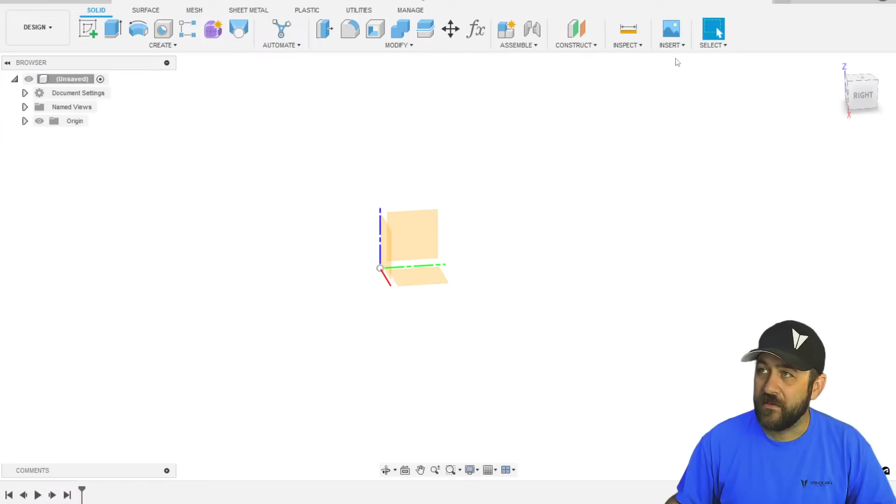Now, I am using a mouse and keyboard. So I'm going to turn on the origin, which will give me my 3 planes here. To pan and zoom around more easily, you can use the center click on your mouse to move around one way. And if you hold shift, that allows you to kind of rotate around. So you'll see me moving around like that a lot. A lot of people just don't know that little step, and it helps you navigate around what you're looking at a lot easier. So we're gonna start with a sketch.

We're gonna put a sketch here on the right plane. Sketches are just like a piece of paper in space. Everything is based off of a sketch. You have to start somewhere. So we're gonna start by clicking sketch up here on the top, and then we're going to select the right plane. So that'll put us flat to that plane. And if I'm doing a tube chassis, I usually start on that plane like that. It's acting kind of funny while streaming, but it's okay.

I'm just going to do the general A to C or A to B pillar setup that I would do on a tube chassis. So, up, back, straight back, and then down. And this is actually kind of where I would leave that. I wouldn't do the radii in this. I am going to do a line connecting the bottom, and I'm going to do a construction line. So rather than coming up here and clicking the line, I hit L on my keyboard. It's a quick little shortcut.

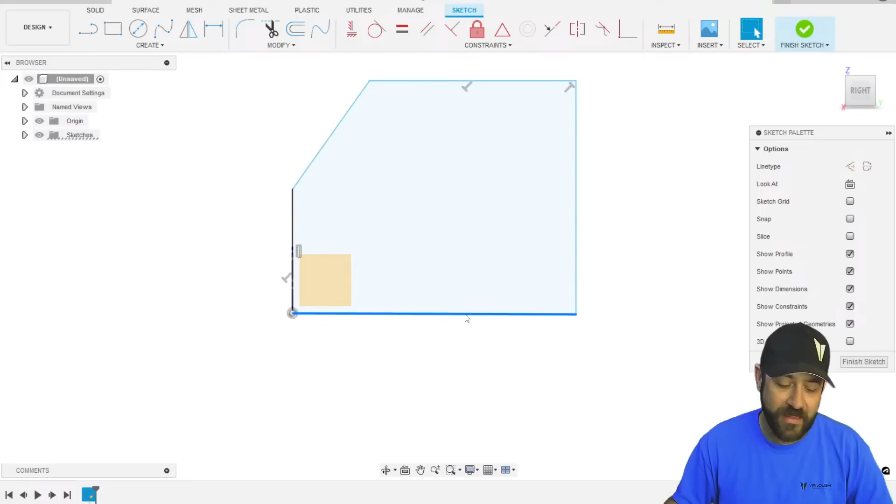I recommend you learn and use shortcuts. So go there, connect that. It's not necessarily needed, but I'm then going to reselect that bottom line and hit X, which changes it to a construction line. You can also click this button in the top that says construction. I'm also going to put a constraint on that bottom one to make it perfectly horizontal. You toggle that right up there. So anyway, that is very simple.

Let's throw a couple dimensions on here. Let's make this 100 millimeters tall, which I was already super close to. 100 millimeters is right at 4 inches. Maybe let's go 125, 5 inches tall. It'll rescale everything because it's the first dimension that we had. We can throw a couple of other things on here if we wanted, a 135. Let's go 120.

No, I don't like that either. Back to 125. Yeah. And then we'll just throw 55 at that guy. These dimensions aren't critical. I like to have a fully dimensioned sketch. That's where all the lines are black. I don't like leaving things that are hanging, because that gives you the opportunity to screw things up a lot easier. So we're gonna hit finish sketch.

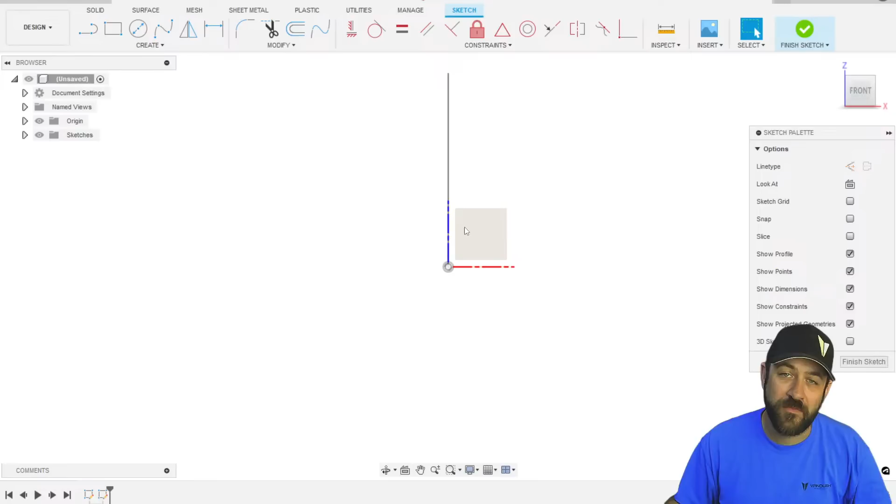Now, this doesn't look much like a tube chassis, I know, but this is how I start things. That's a normal sketch. From here, we get into what's considered a 3D sketch. And this, you can do it multiple ways. This is just the way that I like to do it, and I think it's easiest for me. So I did a new sketch, and then I just selected the front plane. It doesn't really matter what plane you select, though.

And one little tip for this. While the sketch tools are the same in all of these menus across the top, if you go to the surface menu up here and then go back to sketch, how things act is a little bit different, and that is helpful for what I'm about to do, because we're going to be drawing along all different points here. So over here on this right dialog, right behind my giant head, there's a little box that says 3D sketch. So click that on.

With that on, Ben, what additional CAM functionality comes with the paid version? It's things like rapids, just allowing the rapids to work, so you're not just traversing at feed speeds all the time, which is super annoying. So it's something I recommend.

Okay, so we clicked on 3D sketch. We selected line, and we're in the surface and then sketch menu. So from here, I'll come and I'll go to the first point, which is right down there on the origin, and you'll kind of come out and you see how it'll follow that red axis. So we'll follow that, and let's just do 75 millimeters out that way. Come up, do a line again, select on that point, and we'll do 75 again.

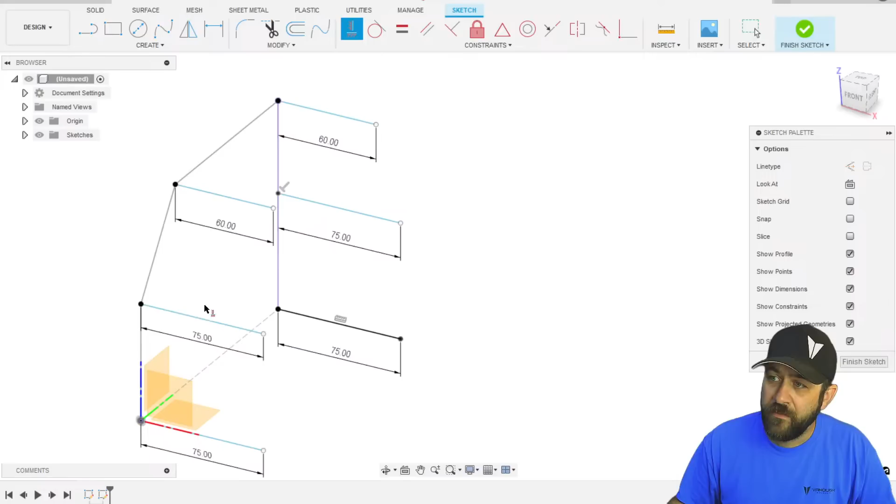So you can see that we're going to hit that horizontal vertical constraint button, and we're going to select all of those lines that we just made, and that will make all of them except this one here fully constrained. Now that's not constrained because we don't have a position on it height wise. You actually can't just grab it and move it, but it's just because of little things. So we're gonna grab a dimension here, and we're gonna say this was 55 in the first one, so we'll just match that to make things simple.

And now that that is fully constrained, you'll see these things, which may not make a lot of sense. But we're going to select each of those lines, and we're going to hit X to toggle them to construction. I just like to do this. It's not super necessary, but I suggest it. Now I'm going to go back to our line command, and I'm going to connect all of those new dots. I screwed up, so I hit escape.

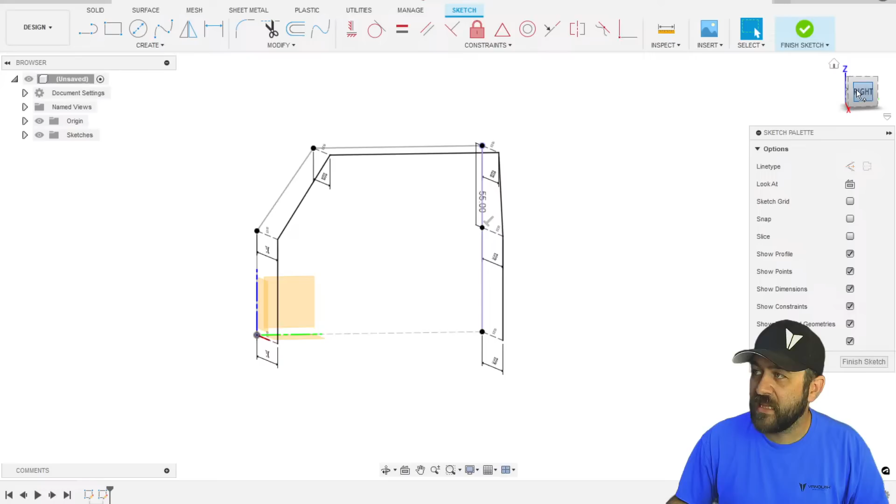So now we have basically what looks like the exact same sketch from the side, but when you rotate to the front, you can see now that you've got that tip in that you would normally have on a cage. So like I said, I didn't do the radius work on the previous ones because it would make doing what we just did here much more difficult. But now we can click that fillet command, and what I normally like to do is about a 15 millimeter radius. That works pretty close for my bender. So we're going to do that to there.

And I'm not going to do it back here. I don't typically like to have a radius joint right here. I guess if it's a cab only truck, you could, since that's all we've drawn. So actually, no, I'm going to leave it this way specifically for a reason. So now we've got what would become one tube, and then we'll have another here. So we need to add a radius here.

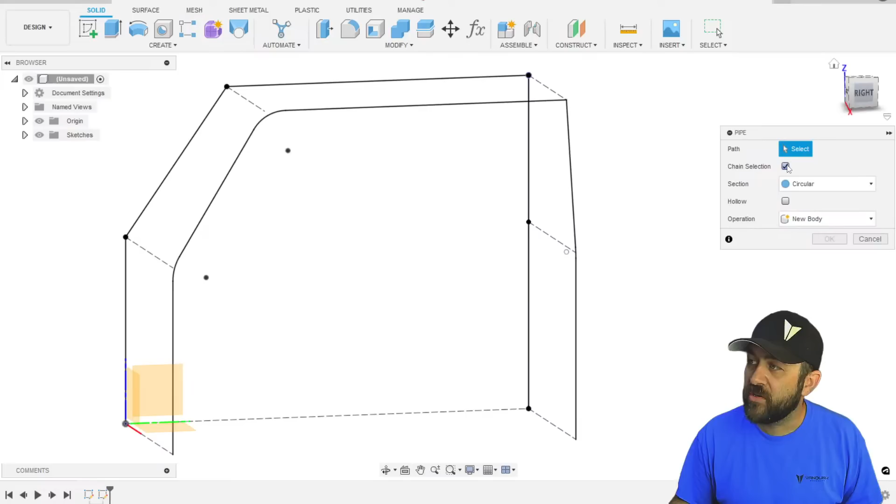15. So these will become two separate tubes. I'm going to hit finish sketch. So now we've got these sketches here. We can come up into the create menu, go down to pipe, and then we can select our path, which I'm gonna turn off chain selection. I'm gonna select the bottom, this one, that one, and that one, and we're gonna leave it right there.

We want to draw just like we want to fabricate. So 10 millimeter is much too large. We're going to type in 3/16 inch. I didn't want to do that. Need a space between the dimension and... 0.1875 inch, and it should be fine with it. Yeah. Sometimes it doesn't like when you combine math and unit changes, but it's no big deal. So we hit OK with that one. We're going to repeat that one time.

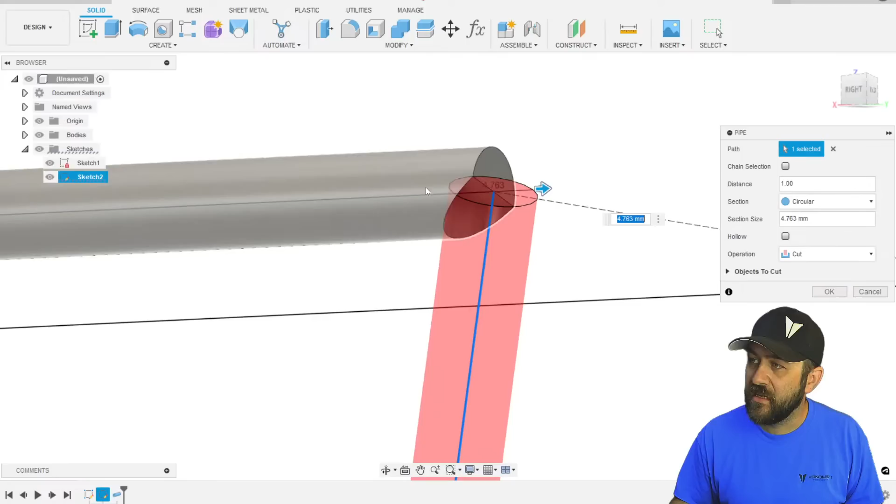Oh, you can see that our line disappeared. So if on the left side here, you expand the sketches, these are what we're looking for. We want to turn on sketch 2 again. So now you grab these, and you can see it's red, and that's because this is intersecting that one there, which is fine. We just change this to new body. You don't want to join it either. You want it to be a new body. It's important for metal fabrication. If you were 3D printing, it wouldn't be the way you would want to do.

Could you use a sweep here too? You could use a sweep. However, if you did a sweep, you would have to draw another profile at the bottom to start on. So basically, this just saves you a step. It makes things a little bit easier in general. It's really the only way that I do tube work is with this command. So even if I was fabricating this with tube instead of solid, I would do all these steps the same. You can make this a tube if you wanted to do like weight calcs and things like that, but in most situations, I don't feel like it's worth the extra work.

So we have a tube chassis set up, kind of, right? We're going to complete this a little bit to make it slightly more complete for you. Let's just do like a door intrusion bar style, and then we'll do a couple of crossbars, get everything mirrored so that it looks appropriate, and then I can just jump right into showing you the fixture side. So that's what we'll do next. We're gonna do a new sketch.

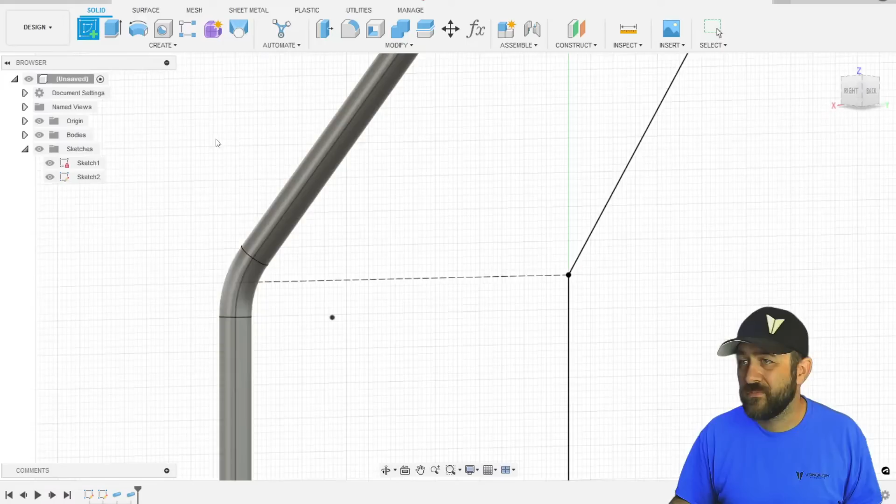I'm gonna jump into surface, and we still have to just select a plane. We can do this outside plane here, which, sorry, that's not the outside plane at all. We'll just select the right plane. That's fine. Actually, I'm not even really sure which one it selected for me, but it also doesn't matter. So like I said, when you go to surface and then sketch, things just act different. It's a little thing. It's really nice though. So I highly suggest it.

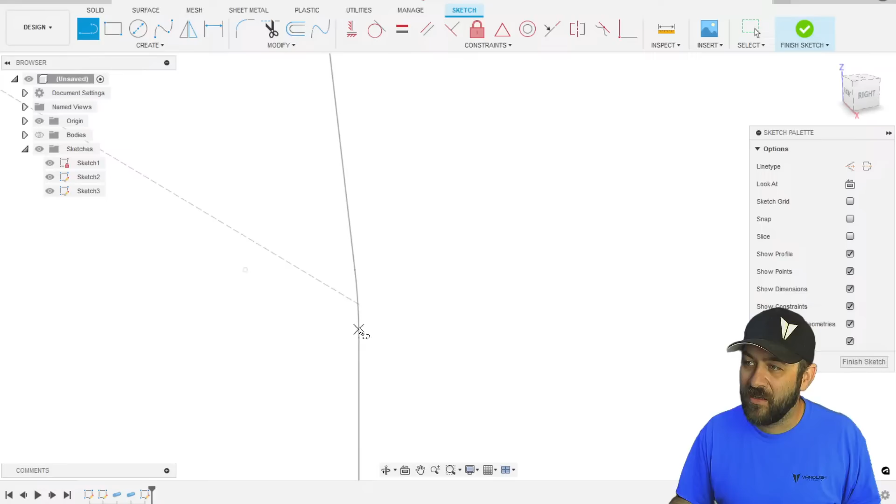And now we can just come in here and you see how it selects. When you zoom in, you can see that center point of that circle. There's a few ways you can make this easier on yourself, but if you turn off the bodies, then you can come in and select anywhere along that previous path, which is what we were working with. So if we select right at the center point of the radius, we follow that blue, let's just go out to whatever point we want, and then let's not go to the center point of the radius, let's do a little kick up, something like that.

Now, this here, let's dimension that. I hit the letter D, but you can see how this one here, if you look at it from the front, it'll actually tip in with it. It goes in and then it kind of goes along with that tube just because of how that top one goes. It's not a huge deal, but it would be a lot harder to draw if you didn't just do a 3D sketch. So let's put 130 on that. That'll define everything. We need to put a radius on.

15 again. Finish that sketch. We could do crossbars and everything in this one if we wanted. Sure, say you want to go back to it.

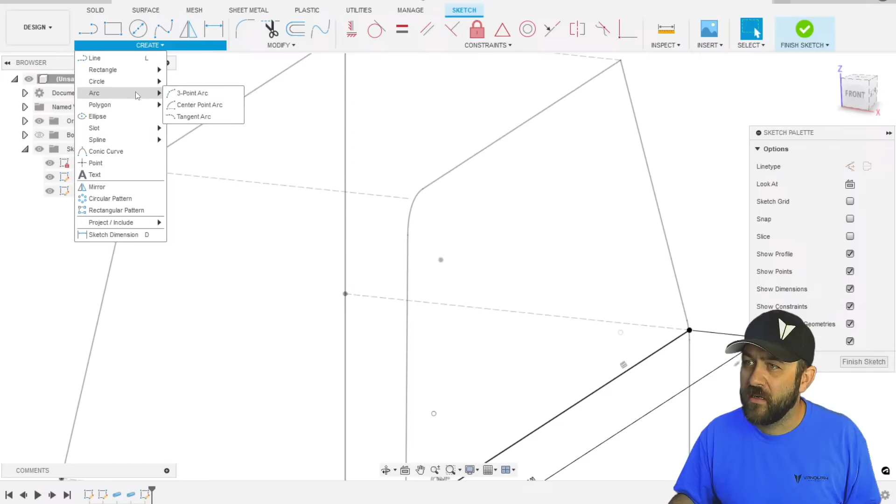Let's hit edit, edit sketch, and let's drop a top one in there. Let's do an arced one because why not? So we're gonna go from there to there.

This can be a little bit funny, but I'm clicking on that line. Now that won't give me the shape that I want, but it'll put the line in the plane that I want. So I'm cheating a little bit. You see how it goes out and then in? Not what I want, but it got me that line on that flat top plane.

So we're gonna do a tangent constraint on that, and that'll get it just how we want. We can throw a, I don't know, I was gonna say, I don't know why it's blue because it should be fully constrained, but it's fine. We're gonna hit finish now. One of the times I'm breaking that fully constrained normal rule that I go.

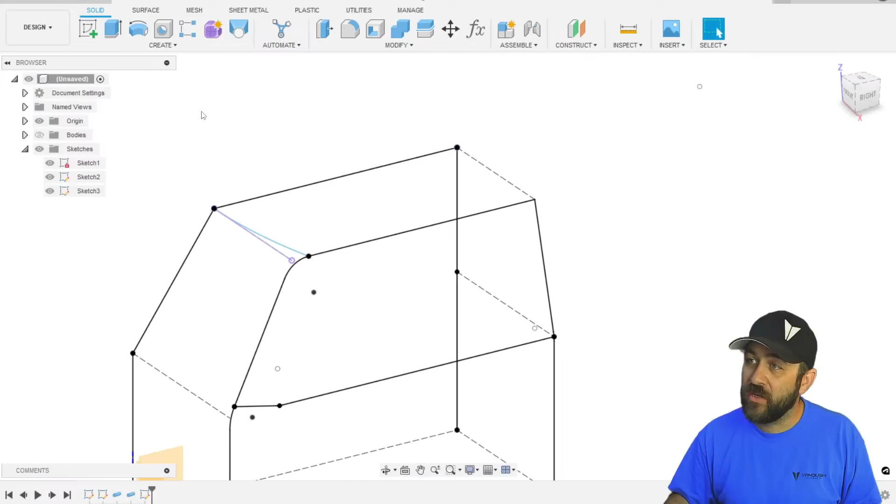So we've got this one, we've got that top. We can do a straight back here since that was, we'll go back and edit that sketch one more time. And actually we can just take this one and, oh, actually, no, we can't. Well, we could. We can hit P for project, select that line, hit OK.

Oh, no, actually I can't because I'm not on that work plane. It probably projected downward and I just didn't notice already. Oh, it actually projected way out here. We're going to delete that line out.

So now we've got three more tubes to do. We can turn bodies back on. Go to pipe, select that one, new body, everything else stays as it was, and repeat that process. Oh, we gotta turn our sketch back on since our lines disappeared. New body.

One more time. We can turn chain selection on here and then it will grab that whole line section. New body.

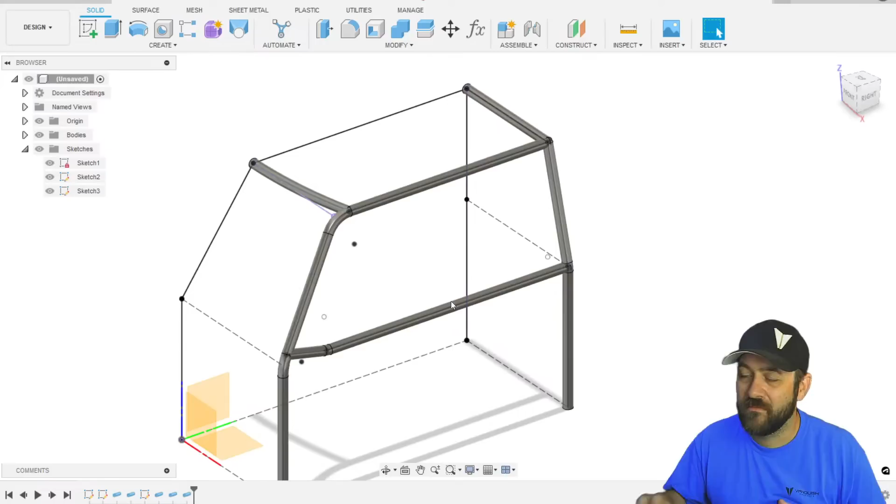So we now have basically the tubes that I think we need for what we're going to show. We could do, of course, the lower seatbelt bar in the back, our windshield bottom bar. There's all kinds of detail that we could throw in, but I want to get into showing you the fixturing and things like that, rather than just going through and adding a bunch of other steps for things that you may not actually need.

So we're going to do a mirror, and we're going to select the bodies that we want to mirror, which is pretty much all of them. Oop, we forgot a guy. That one. Select the mirror plane, that side. We're not going to hit join. We're just going to hit new body. Otherwise, it will make everything connect, and we don't want to do that.

So now we can hit combine, and we'll combine the ones that we want ourselves. So that, there you go. Now you have something that kind of looks like a cage.

One reason that I like drawing cages is so that I can always modify and change. Say there's something about this that in the end you just didn't like the style of. Well, you can go back to that very first sketch and say that I want this to be 135. I want it to be laid down way more.

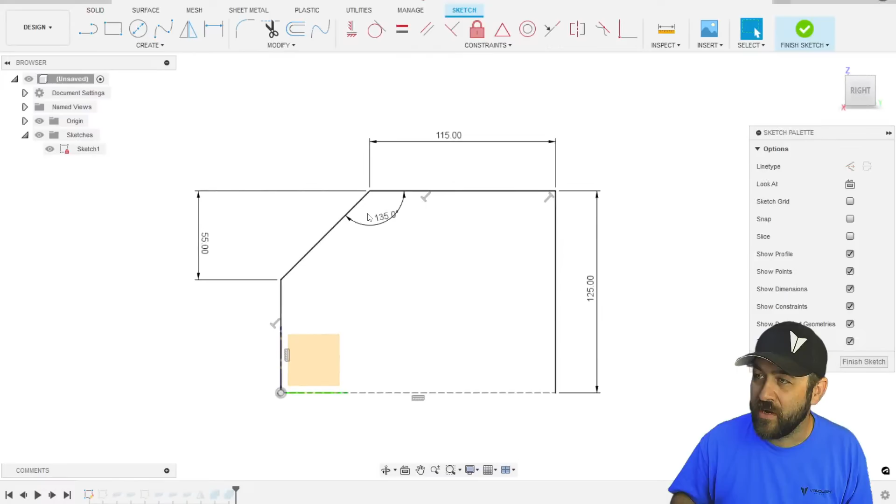And then when you hit finish sketch, it's now redone, and it's laid back, and you can see that I like that style way better than where we were before. So we're gonna leave that. You always have that ability.

If that wasn't the one, maybe you wanted more pinch at the top - that was in sketch number 2. You could go back and edit it. Maybe you want the front bar to tip in more, and the back needs to flare out. Whatever it is, you can just keep going back and tweaking your cage design over and over. That one visually I do not like, so I'm changing it.

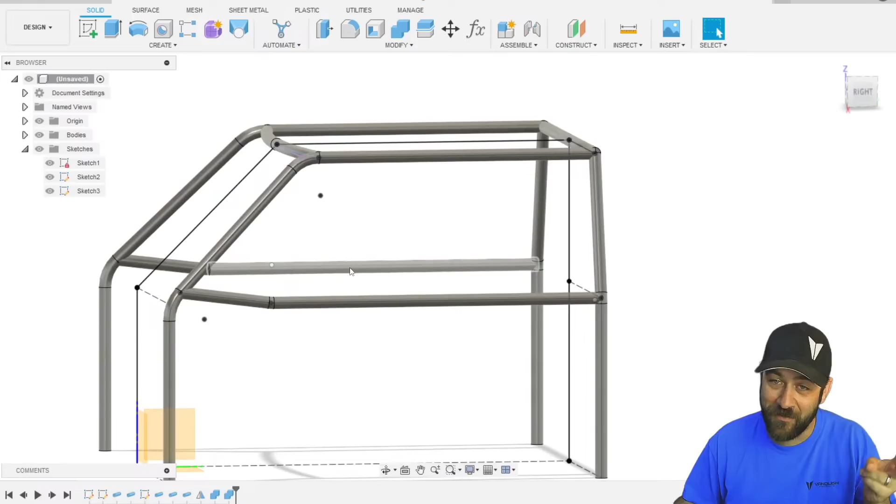So we're still going to go through it, whether some of you would like it. Hopefully it helps somebody, and I can show you how I've been doing things.

First of all, things that I've been doing lately that have really helped me are the 3D printed bend templates. Not the whole fixture even, just the template of the actual tube. Paper templates are great - they helped me build things more accurate, and I really enjoyed them. But 3D printed templates make me 5 times more accurate than paper templates did.

There's just certain things about projecting - taking a tube and putting it on a piece of paper, and you're kind of like, that seems about right, it's projected about. That's different than when you're putting it into this fixture that maybe even has complex bends, and you're like, that's perfect, that fits just right. So if you want to get into this stuff, this will make your work so much more precise, so much better. I can't say it enough.

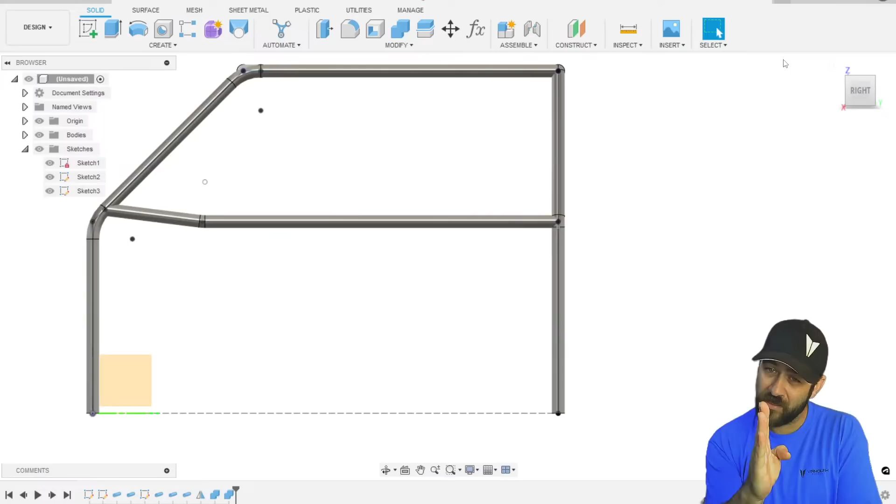There's ones that are way easier than others. So this tube here has a bend in it, and this tube here has a bend in it - those are both single plane bends. Even if this had 2 bends in it that were in that same plane, like if you looked at it straight on - like we look at this back one, that looks straight - it could have 5 bends in it going every which way, but as long as it was flat when viewed from the side, it's a single plane. That's the easiest way to do things, and the easiest way to make templates.

So let's do that one first. I'm gonna select all of these bodies just for the sake of it. I think I've got them all selected. I'm gonna hit the V button on the keyboard, and that'll turn them off. We can select that - oh, it doesn't work with sketches. Okay, that's fine.

So we've got just the single sketch on. We can even turn off this body for now. We need to create a plane here - again, a plane is like where you're setting the piece of paper for your sketch. It has to know where you are. So sometimes you need to make up those planes because they don't exist. When you start, you only have 3 planes - right, top, and front.

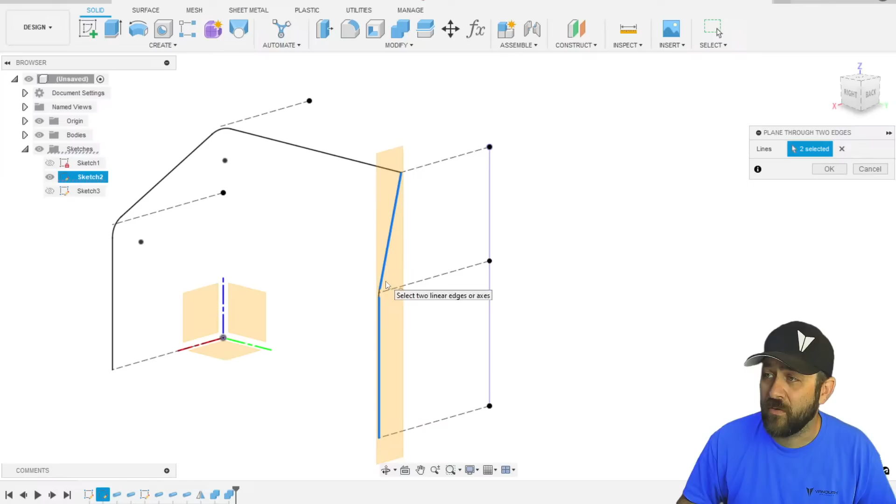But we need one over here. So we're going to go over to construct, hit that drop down, and use this plane through 3 points, or plane through 2 edges - you can use either one, they're both very easy. Say 2 edges in this one - we're just going to select this edge and this edge, and it's going to create a plane for us. Now we can hit sketch and select that plane, and it'll rotate to it.

From here, I'm just going to hit P for project, and select all 3 lines of that tube, making sure not to grab the line over there, which is actually our front tube - so we just have that. I'm going to project those, which means they're now in my sketch and I can use them. So I hit enter, and those are purple. Now I'm going to hit offset up here, and we're going to select all 3 of those again.

And I prefer to go to the inside of my bend. This dimension isn't critical, I like between 8 and 10 millimeters. We're going to hit -8, so it goes to the inside. And then from there, we're just going to connect the dots at the end to create a closed profile.

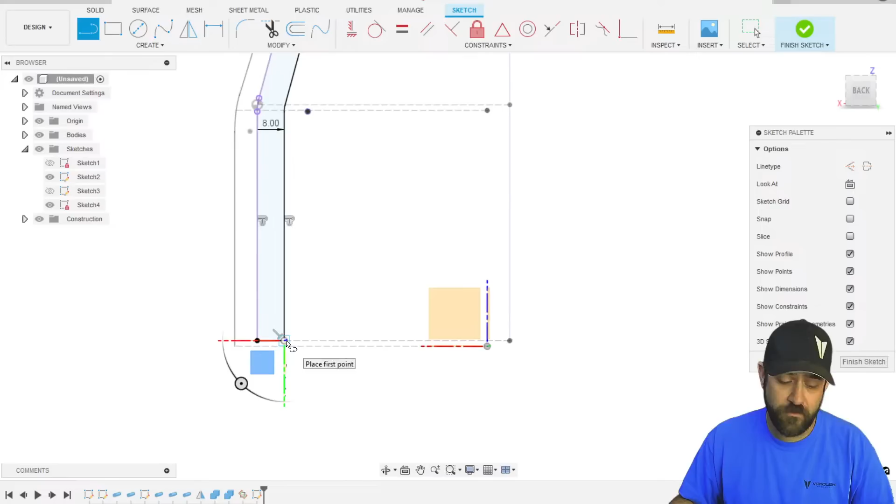Now we've got the template that we're going to use to create everything. I'm going to hit E for extrude, and select that. On the right side, we're going to hit symmetric, so it goes each way equally. We'll hit this toggle option, which means we type in one dimension for a total distance. A 3/16 tube is just under 5 millimeters, 4.7, so I like to go to 8 for a total width. New body, hit OK. So now it's just hanging out there.

When we go back to bodies, let's just turn everything on. Everything can kind of blend in here. I'm going to hit A for the appearance menu. That'll pop up. I'm going to right click and duplicate, then right click again and hit edit, and select a red color. Then I can drag that onto that body so you can see what we've created a little bit more.

Now we're going to go back up to that combine. We'll select that, and then we're actually going to use the subtract function. So select subtract. The target body is the thing we just created, and the tool body is the tube. Now we need to click this keep tools so it doesn't delete our tube that we started with. Then we're going to hit OK.

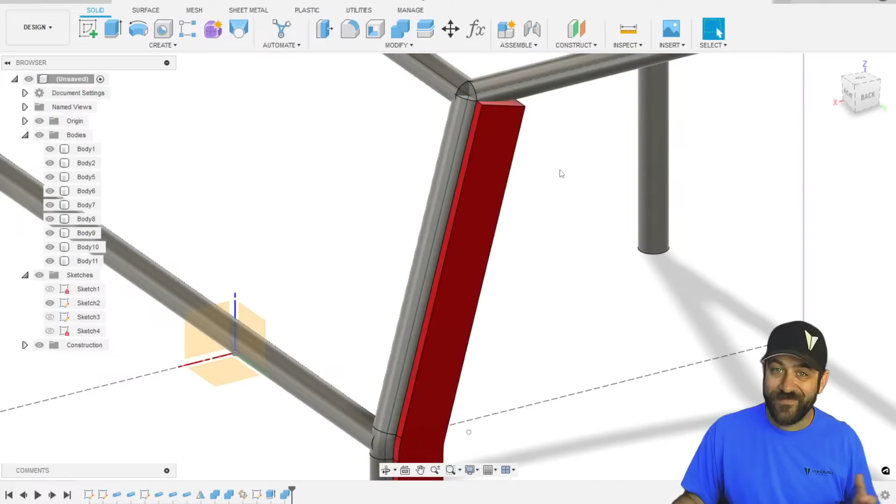And that's it, now we've got a perfect bend template. If I go over here, right click and hit isolate, it'll turn everything else off except that. And you can see now we have this perfect representation of what our tube should follow. And then you just export this piece.

You come over here and hit... before we do that, we're going to do one other thing. We're going to come in here and I'm going to hit the press pull, select where the tube goes. Now in here, I'm going to do -0.2, and you can see how that increased that radius a little bit. When we turn, I'm going to hit right click, unisolate.

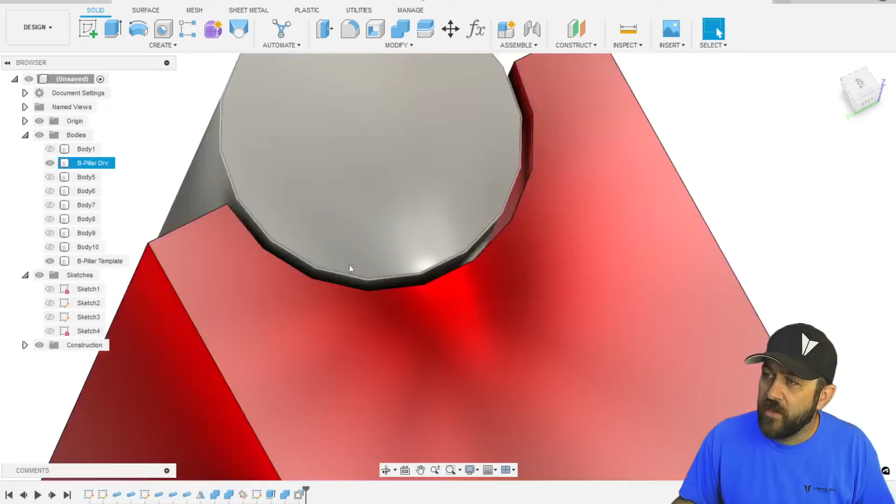So we're going to re-isolate, and I'm going to turn that guy back on. You can't see anything when I zoom out that far. You can see it just gives us that little bit of tolerance around there.

Everything's going to be a little off. Your printer's not going to be perfect, your tubing isn't going to be the perfect fit to the template. If you give yourself just a little bit of fudge room, you end up with something that's a little bit easier. It's one little step worth taking. You could modify that 0.2 to any dimension you want, but that's my recommendation, just to give you a little fudge factor. 0.15, 0.2, both of those have worked well for me.

Now, not only has this given us the bend template, so you'll be able to bend your tube and set it there and make sure it's the proper bend radius, also the bend position. Do not cut your tubes before this. Bend it first, leave extra on each end, and then this thing is also your length template because we made it the proper length. So mark your tube after this point at the bottom and at the top, and then cut it to that length. As long as your cage is accurate with everything else you've done, you end up with a tube that's supposed to be about this long.

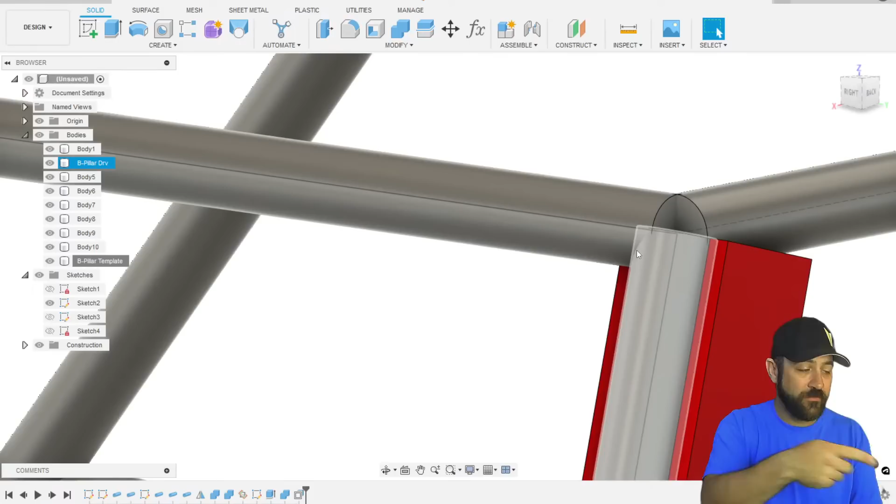You're going to have to do a little bit of coping at the ends, no big deal. If this amount of distance isn't what you want, like if you wanted a 45-degree cope, which is what I did on this truck in front of me, before you get to this point you'd just extend this by 3/32 of an inch, or not—you could leave it like that and fill it with braze or weld, whatever you plan to do.

Those are personal preferences on your end, how you like to fabricate. That's the reason I don't cope the joints in CAD—this gives me an easy way to calculate fab, and then I can go cope my joints in the garage and everything works out well.

This, though, is a length and bend template, not one of the fabrication jigs—that's a different process. But this is how I do these, and I'll do one for each tube that has a bend, and I even did it for the straight ones on this truck.

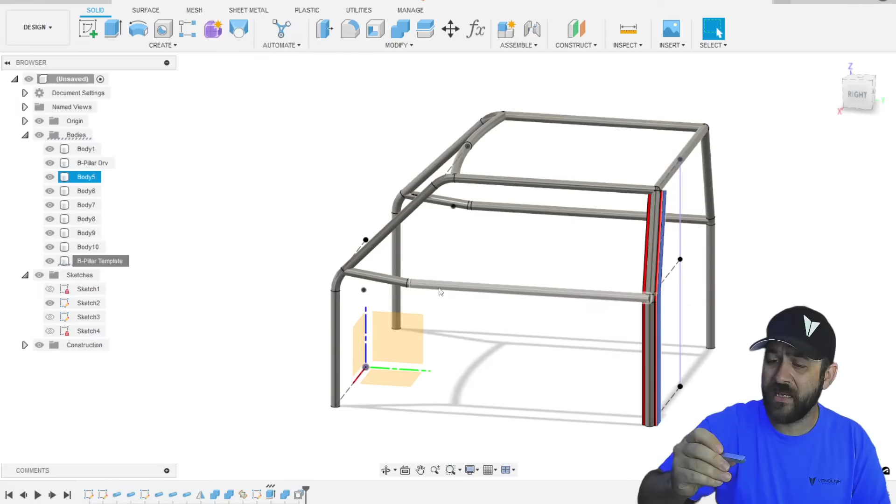This one, if you can see, says rear bumper. This was just a straight template, used so I knew the length it was supposed to be, and then I labeled what tube it was supposed to be right in the software.

If you're doing a ton of different templates, it's nice to label. Labeling's pretty easy if you want to—sketch, select your template, and then come up here to text. Just go, this is going to be...

I think you could have rotated, but click text on path—yeah, I could have done it that way before. And then this would have been B pillar.

We'll make this 6 millimeter... 5 millimeters. I like to use Impact—it's easy to print and it looks good. Lowercase looks like crap, but whatever.

So once we've done that, finish sketch, select it, hit E, and go -0.2. That gives you a full layer height of 3D printing, which is usually enough.

Labeling's nice—it's easy to forget, especially with straight little templates, because it's like, which one was this? So it's worth doing. The bends you can usually determine which is which, if that makes sense.

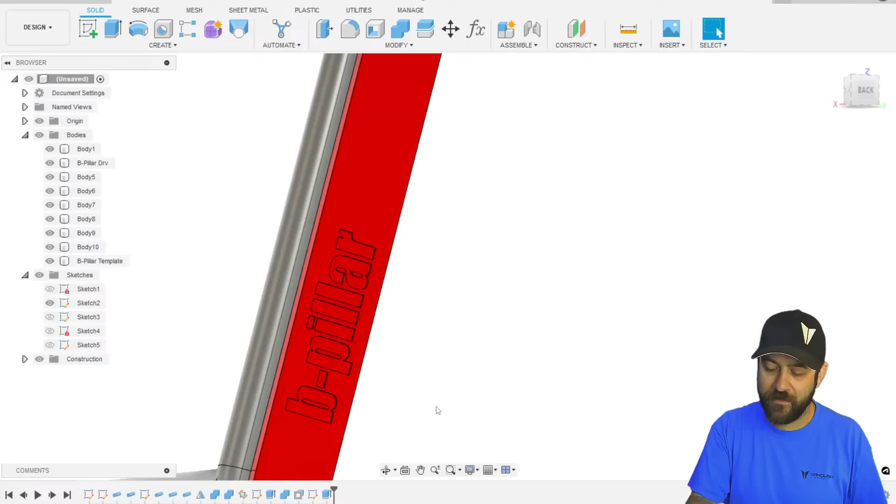Now, the fabrication jig side, showing that part of it. This process is pretty straightforward for the rest of them. It does get tricky with this A pillar.

That's a little more tricky because it's multiple pieces, but you could do basically the same process in a couple steps—one plane for the top portion, one plane for the bottom portion, then join the pieces when you're done. That should work fine for most people.

There's different ways to do it, up to you on how you'd like, but that should give you an idea of the principle of the project. So I'm going to turn that one off—we don't need it.

I talked a little about creating new planes before, and that's basically what you'll be doing over and over to create the jigs for fixturing. So we're going to turn off most of these bodies.

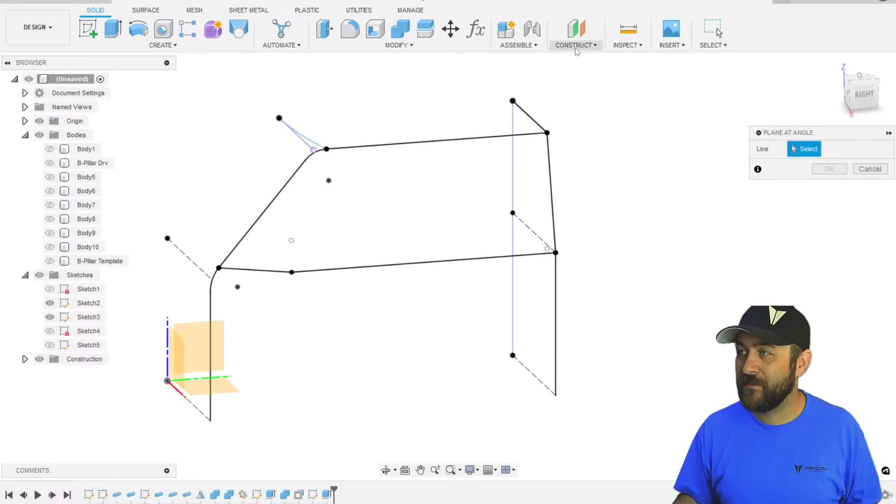And we're going to turn on those two sketches. From here, we're going to hit new—well, not new sketch, not yet. We're going to come up to construct, and we're going to do plane at angle. Plane at angle is going to be our first one.

So we'll select that top tube there. Now you could do this flat, works fine, but it can make it harder to get the tubes in and out of the jigs once everything's welded in place. So I'd suggest rotating this plane to an angle. You could go straight in, but I don't recommend that either, because once you weld the two halves together you end up with the same thing. 45 works pretty well.

And from here now, you can just do a sketch on that plane.

And we'll just do a box. We're going to dimension 4 millimeters off that way, 8 millimeters total. And we want to stay a little ways away from the intersections because of the heat that will creep from the tubes as you're welding.

And if you're planning to braze, you can still use all of this to fit things up and make sure everything fits perfectly and then take it away to do that. Or try and get some heat blocking putty. There's things you could try, but I think this mainly works best for TIG welding.

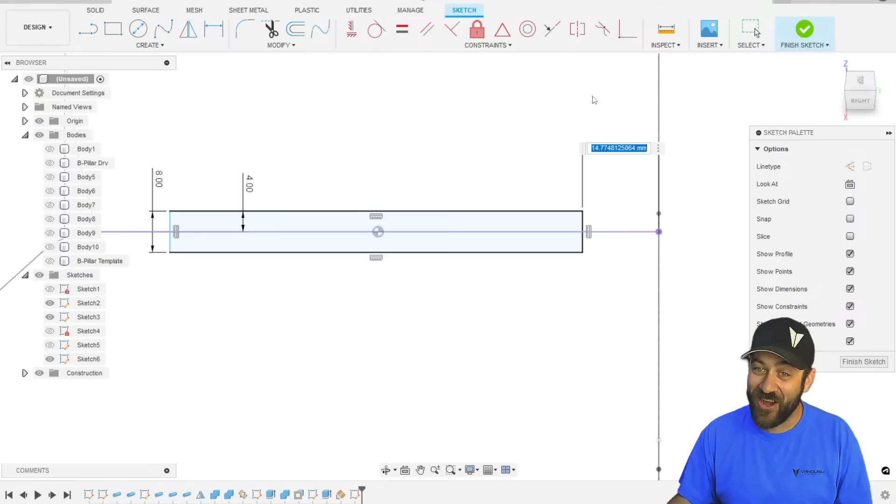And I agree that now you need to know CAD, you need to have a 3D printer, you gotta have a TIG welder. All of this is why this show is so wildly unpopular. I know why this show does not do well. I just alienate everybody slowly or quickly even. But thanks for being here for it.

We're going 25 millimeters away. That leaves a short section, but that's all you need because you're going to have had a template to make sure that it was the right bend shape. So we're just going to make a few of these along the way, and that'll give you the places to put it. So we've created that. We're going to hit E for extrude. Drop that guy down, say 20 millimeters for now. It doesn't really matter at this point, but we need to repeat that a bunch.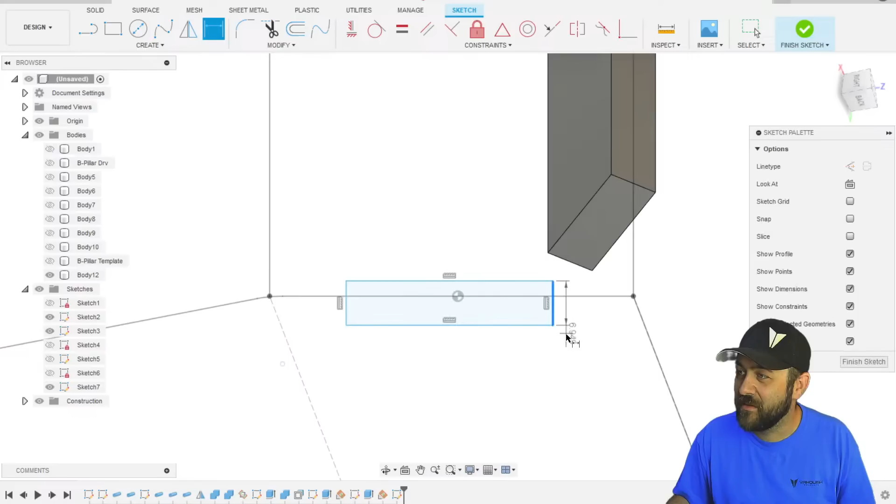8 there, 4 there. After we get through this part of it, we've got to connect all of these random little... escape, undo. We may have to go to 20. Otherwise, we're just not going to end up with enough. So there. This will all make sense. Don't worry your pretty little heads. 45. Nope, that's 45 the wrong direction. So we're going to hit edit feature, and rather than 45, we're going to hit negative 45.

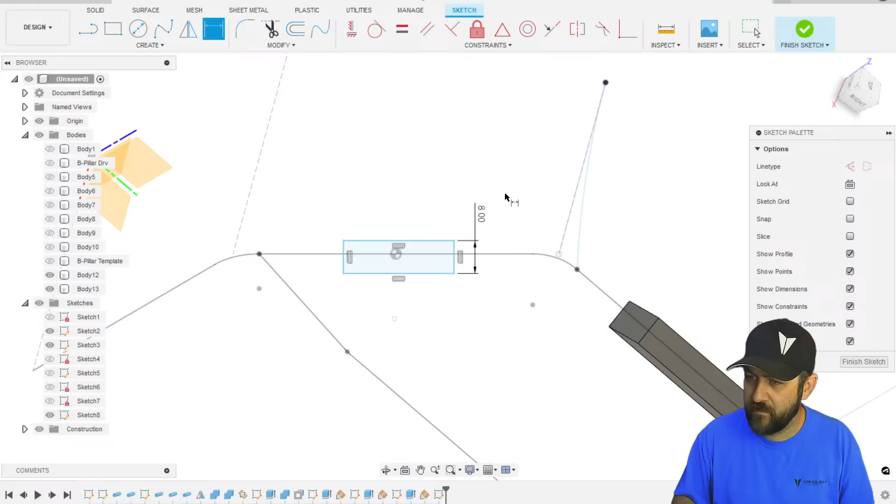What in the world did I do there? There we go. I don't know. Maybe that's what I did before. Just look wrong. I'm gonna go to 20 on those. Oh, we need to set our 4. Something like that.

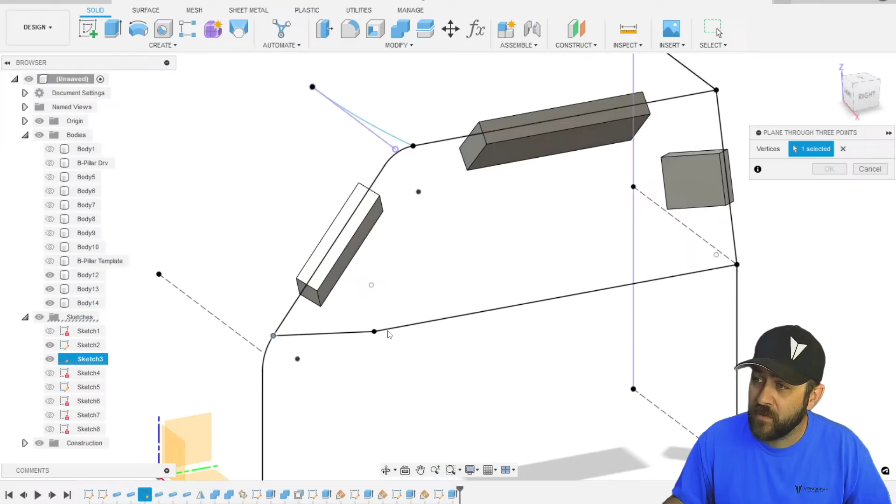Any chance you could go over importing a 3D scan? Yeah, I think that this is probably going about quick enough that we'll probably be able to get to that. It is something I wanted to do. So before I talked about creating a plane through 2 edges. I also mentioned you can use 3 points. That's another one that I like. So I did 3 points there, and we'll just click this one, and this one.

Now I'm gonna hit P for project. We're gonna grab those, and I'm just gonna do my offset. Same thing the opposite way. -4, and then I'll create a line out here, something like that.

Is there a shortcut key for adding dimensions? D for dimension. That is the one that I use all the time. I use shortcuts a lot. I probably do it unconsciously, and I forget to tell you guys. Yeah, if you have any questions, absolutely drop them.

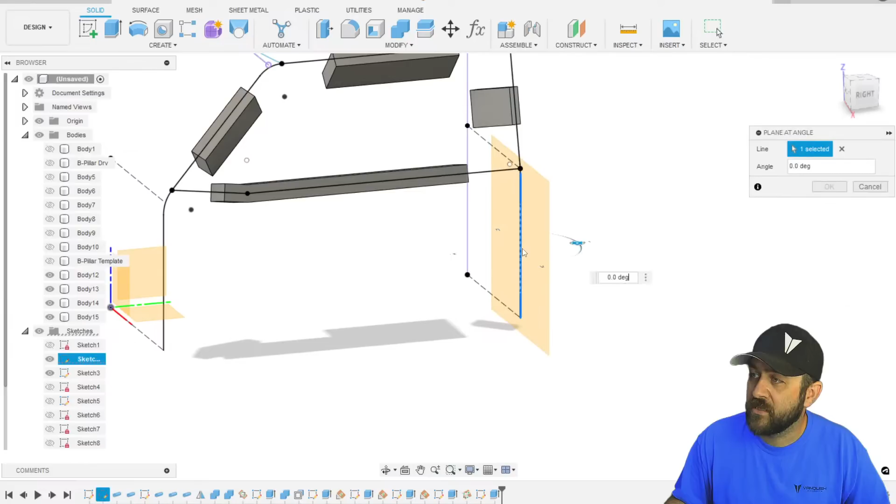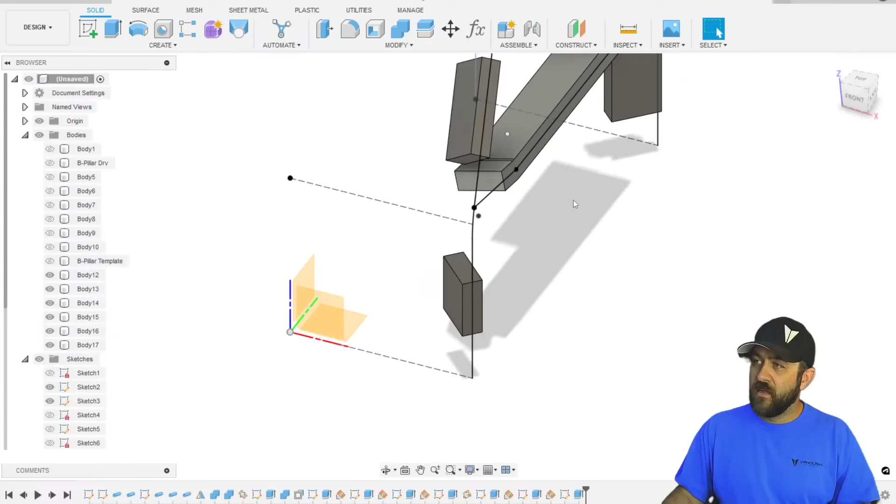So you can see that one was at a bit of an angle already. That's why I just kind of left it like that. And we need a couple more, and then we'll be able to go to the next chapter. Actually, what's 45? Yep, we're gonna go 45. And 20. We'll do one more down here. How did I do this again? I forgot. So we'll just do from down here. 20. All right. So now we've got all these random stuff.

Josh, how would you design your cages if you didn't have CAD? I've been designing my roll cages in CAD since, I don't know, like 12 or 15 years now. There's no better way for me to do it. CAD is the way to do it. CAD is the way that it's done in the full-size world. Honestly, if I wasn't designing in CAD, I guess I would only be freehanding, because to me, there's not a barrier for CAD now.

There used to be. There weren't free CAD programs before. They were super hard to get. It was a nightmare. Now they're available for free. So the only thing stopping you is not wanting to learn. Of course, there's not having a computer that can run it. That's 100% a thing.

Computers aren't necessarily inexpensive, so there is that. That's a thing, I get it. You know, graph paper can work. There are other options, but that's the thing. You can do it old school, which is just CAD before CAD, CAD before computers: cardboard aided design.

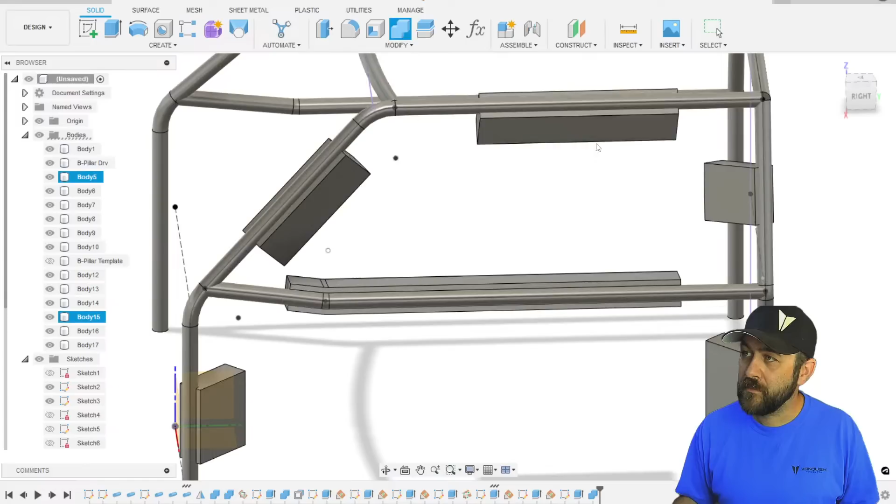So now we need to do what we did with the other template, and we need to create the groove. So we need to make sure keep tools is on, and we've got to go through this process a handful of times quickly. Make sure you're selecting the block first and then the tube. That's the order of operations for this particular tool.

So we've got all of these things hanging around now. The hard part is over. That's the hard part of creating these silly jigs that I've been making. From here, we're just gonna create a new sketch. We're gonna go to the bottom. And now we just need to connect from the, you know, tore up from the floor up. We're starting on the bottom, and now we're here.

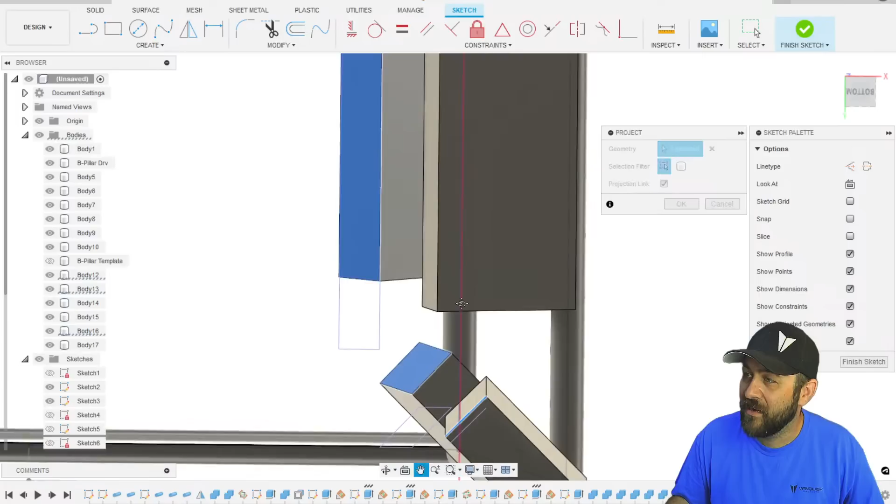What other things could I reference? So I'm gonna hit P for project. I'm gonna grab the back side of this one, back side of that one. That one is flat, so we're just gonna grab that line there. We're gonna grab that guy. We got anybody else floating around? We need that one. And we need just this line here. Do we got them all? Gotta catch them all. So those are our areas we need to connect. Hit look at, and it'll rotate us up.

So we got that. Now I'm gonna turn off bodies for a minute, because this does not have to be fancy. Well, actually, I'm gonna undo a couple of those, and we're gonna do this slightly different. We're gonna hit finish first, okay? We're gonna turn bodies back on. There we go. And we're just gonna extrude up to some of these for a moment. So we have those profiles that we've done there.

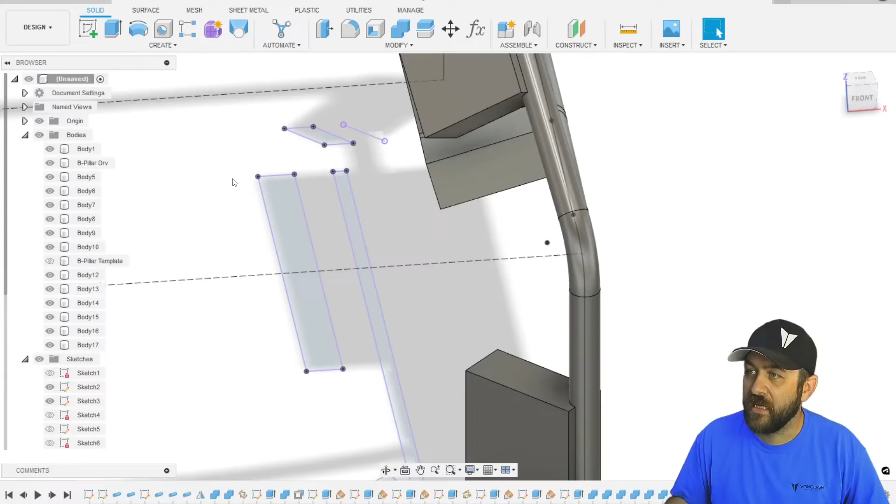We're gonna hit E for extrude, click that. Over here where it says distance, we're gonna say to object. And then we're gonna extrude that up to this object. And we're going to hit this one over here. This brings it up to all the edges. It can matter depending on the ones you're doing. Now, of course, it's intersecting, so it wants to cut. We could say either join or new body. I suggest you do new body still. Otherwise, you can start connecting your tube work to your fixtures. So it's just an easier way to do it.

We do need to go turn our other sketch back on because we need that. And we're just gonna repeat that same process for the rest of these. Again, you have a lot of options. At this point, you could just extrude this guy back so it touches there, same here, and you start blending stuff, but I'm not gonna do that just because of brain power while streaming. I'm not saying that I wouldn't or I haven't done those. I'll open up the jig file that I made for the hack after we get through this part, just to show you what I went through on that one.

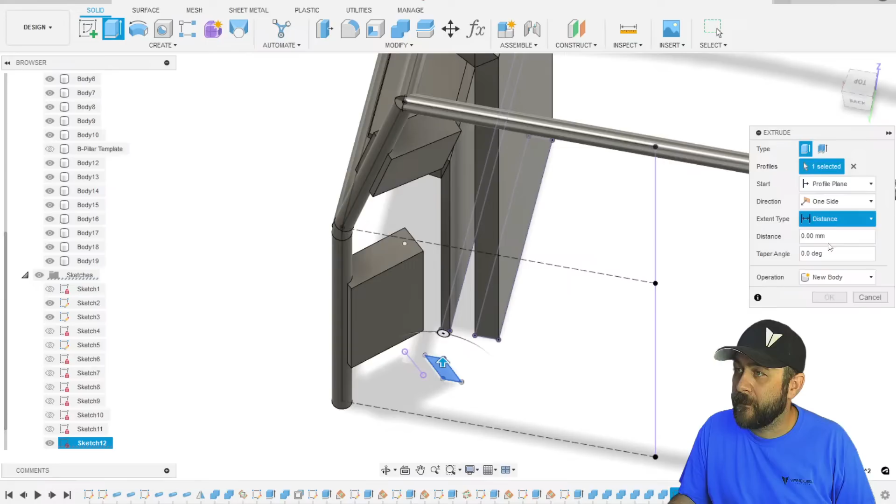Extrude to object, new body. So you can see we're starting to get all of the things aligned. This one, we can grab those two profiles. Oops, to object is what I meant. Kind of a funny guy hanging up there. We're gonna be able to fix that super easily, and I'll show you how in a bit. Not a big deal. So we still have these guys floating out there. That's not a tough one to solve though, so we're gonna be in good shape.

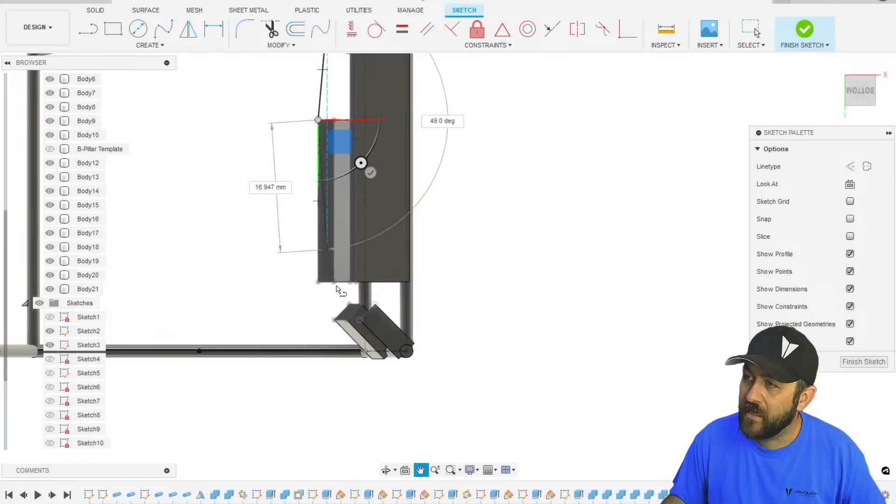I'm gonna go back to the bottom. And now we can just kind of connect some dots, honestly. Like that. We'll just go back. We're going to project that whole thing, but we're not going to go the whole distance. We're just going to go to there. I'm going to go all the way across just because it'll give us a nice wide base. I'll hit a horizontal constraint on that guy. There we go. Project that. We'll make that intersect.

So we're still open. Where am I missing a profile? Oh, this is not projected into here probably. Same goes for here. So there, it's got it closed.

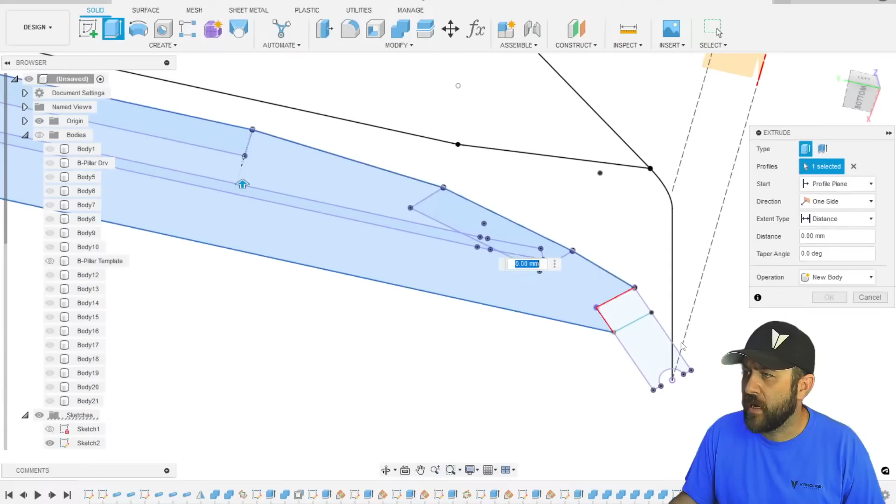So now we're just going to be able to grab all of that, grab this and this, and let's just go up 8 millimeters. 10's a little fat on a base. Turn the bodies on so it shows, and hit new body. Okay. We haven't connected that guy yet. We just had an overlap, so. That there. It's okay.

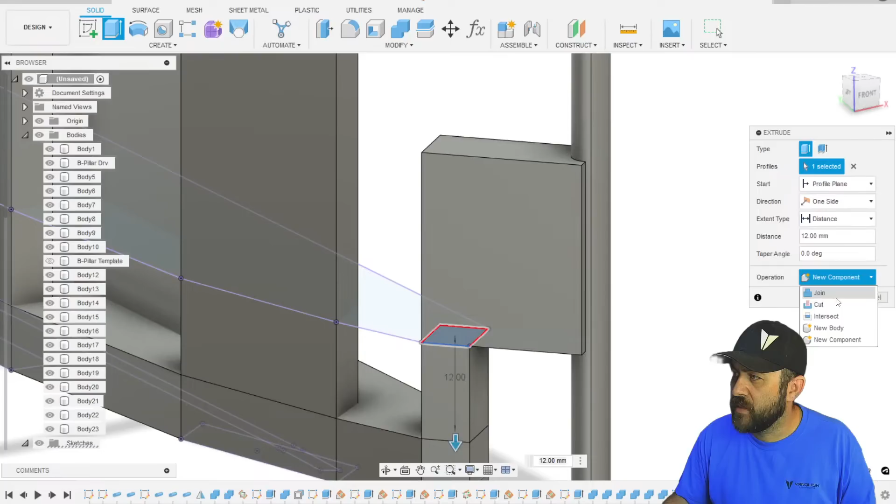This is an oversimplification, but it would still 3D print, so it'll still work, but it's not the prettiest thing I've ever done. Again, we're gonna not hit join. But what I think that has done is, where was our last tube structure? It should have been that one. So you can select here through here and turn those off with the V command. So then we're only left with templates of the jig.

So this is all one piece to 3D print now. So we're gonna go in, I'm gonna hit the combine. We're gonna actually use combine. I'm not gonna hit keep tools, but we just need to select all of them. So those are all the things. Hit OK. And now that's one body.

I was talking about this guy hanging up there. If we just want to select that face there and hit delete, it'll cut through that. It's a handy little thing to do. Just go in and cut bodies here and there. Now this would 3D print. There's probably things I would do. I'd come in here and I'd probably add a big old fat fillet. Make that a little easier.

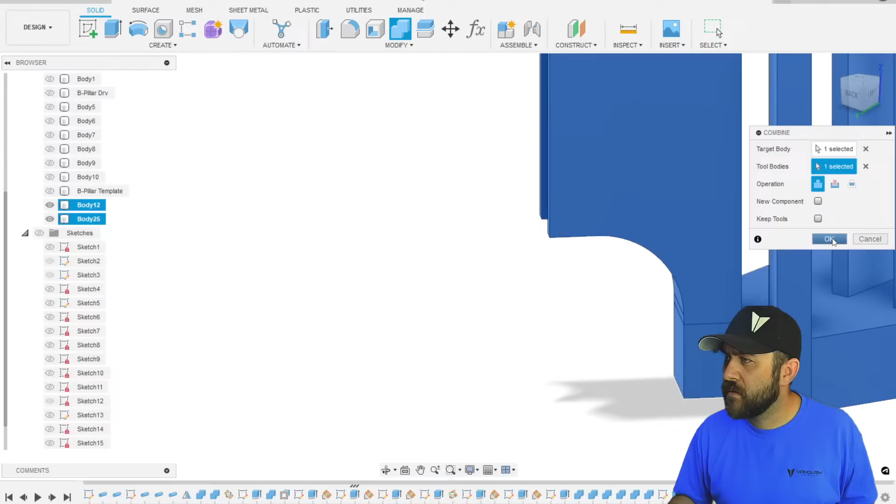Is this not joined? Did I miss one? That's weird. I don't know why that's not showing a consistent... Oh, because it's not joining. Well, that's just interesting. Let's turn that off for a second and just drag that down by 0.1. Now it's 1. Weird. It just was not combining. This guy here is my least favorite, how it does not combine, like connect.

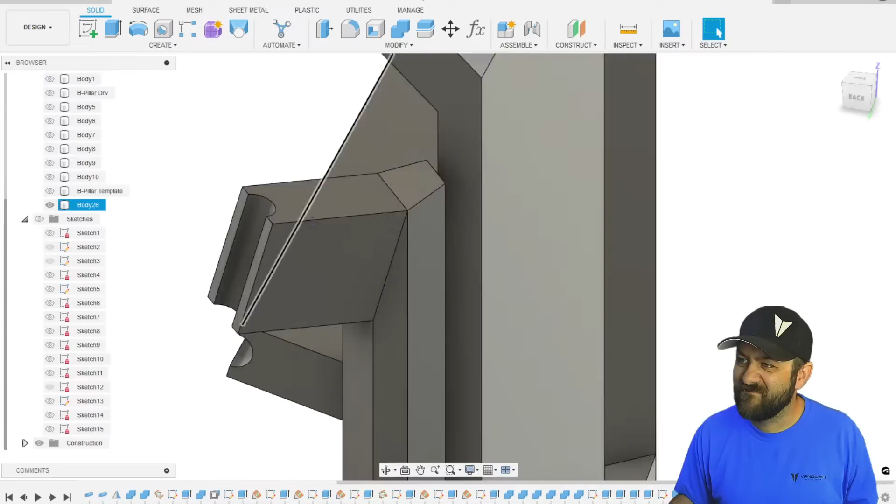So I just grab the push pull and I just grab that out and just drag it a little bit. Would I not? I hate that. I don't like that at all. I'm gonna hit extrude instead, and I'll just grab that and drag it out. 7, yeah, sure. Then come down here, select that, hit delete, and it'll clean that face all the way back up top. Just made it stronger, easier 3D print.

Again, you could add fillets here. You could take and grab this. It's a little thin back there, so just add some thickness to it. 3-4 millimeters like that. That thing will be super stout. I mean, it's almost touching the other one. I'd probably just combine them, but it doesn't really matter. So now you've got, go back up, we'll turn all these on.

Like, that's a jig. That is all I'm doing to be able to create tube chassis so much more accurately, so much simpler. There's a couple of other things that I do like to do, and that is add zip tie holes. Wow, oops. Yeah. 10 is there. 3 millimeter hole, it's fine. Just throw it through there.

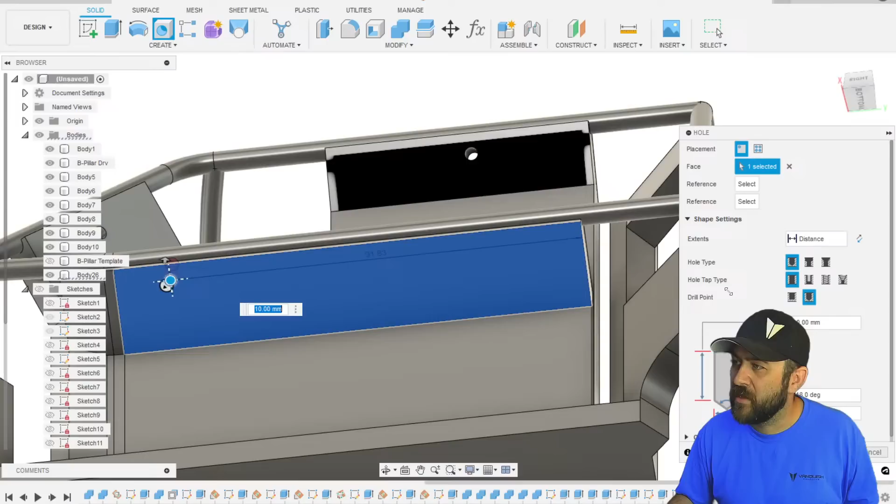I don't use the hole command all that often, but if you don't want to draw another sketch, these are not critical. These are just so that you can put a zip tie through stuff. So just make it easier on yourself. Just put them where they need to be. If you're doing multiple on a face, yeah, it might have been easier to do a sketch with 2, but probably not. So there, now you got zip tie holes too.

So you put your tube in place, you zip tie it in there, and then it's not moving. Once that's fixed in place, now you can cope your tubes, make sure it fits, cope your tube without trying to hold one and the other and be all awkward with it. It's just done. Let's see, is there any of them that would be difficult to get to here? Not really. These would all be pretty simple. So that's pretty much the hard part with the whole jig setup.

I'm gonna open up. My Lord, 11 o'clock. So

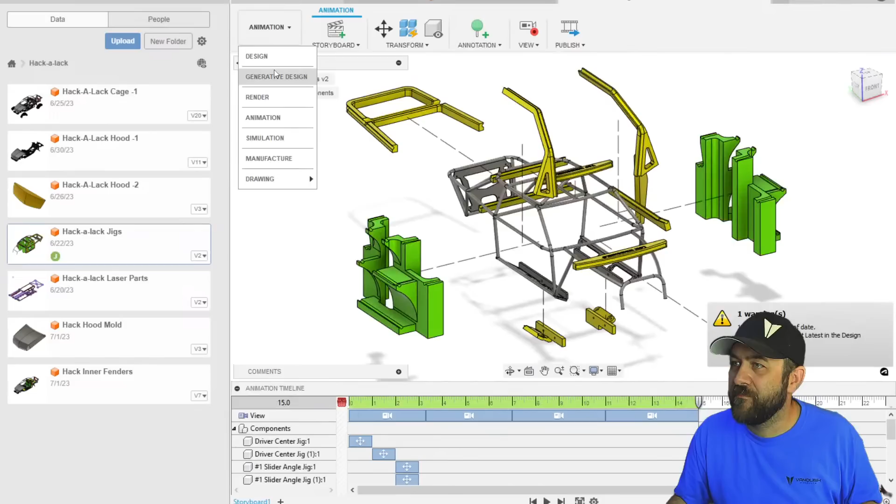These are all the templates and jigs for that most recent project I've been doing. The yellow are my tube length jigs, and the green are the ones for the actual fabrication and assembly of the entire jig. Now, let me turn off a couple of these.

There we go. A couple of stragglers there for my sliders. But you can see that I did basically the same type of thing for everything else. I also did the crossbars in this. I fabricated the side first, then I created the other side.

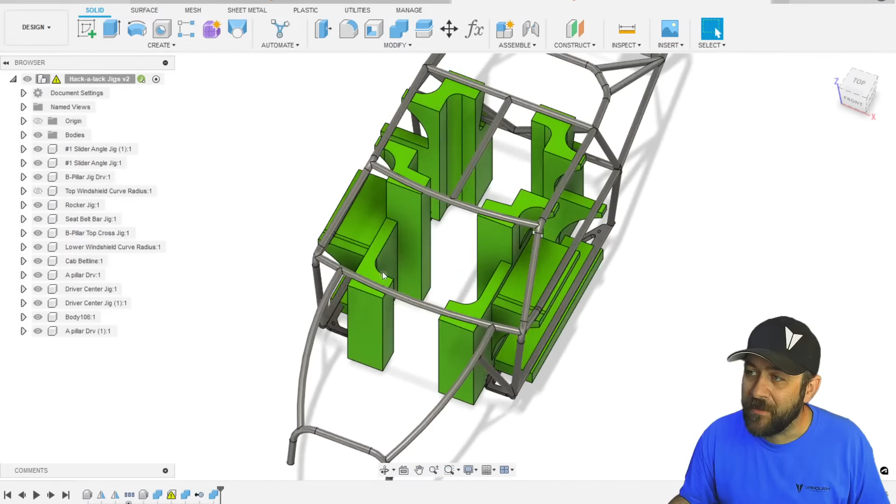Then I bolted, oh, why aren't these the final version in here? Did I lose my final version with the bolted? That would be unfortunate. Huh. I mean, I don't really need them again because I already created them and used them, but this was completed, and there's overlapping joints in the middle that allow stuff to bolt together. So, oh, and the whole back half is gone.

Sick. Alrighty then. Well, you get to see a portion of it. I guess I lost the data for the rest of that. I'm glad I didn't need it, but that seems so weird. Huh. I don't think I did it in the cage file, did I? We are checking. Bodies. No, it's not here. Well, that is unfortunate.

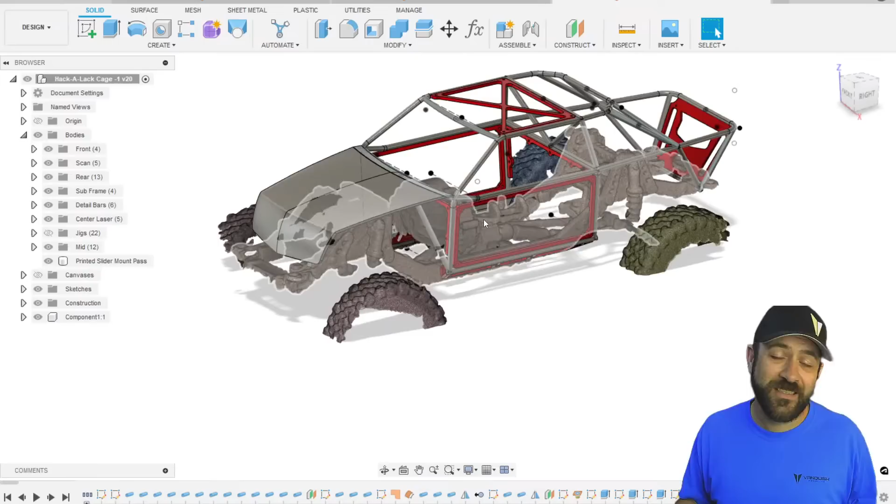Shit happens. Anyway, long story not so long. Let's talk a little bit about... I did have a warning in that. What was it? The component is out of date. Oh, I just have some sort of referenced component in here. We'll update. See if it miraculously brings all my stuff back. Nope. Nothing changed. Everything is not awesome. That's quite a bummer. This is me mad. Okay. Whatever. I'll get into that later. But

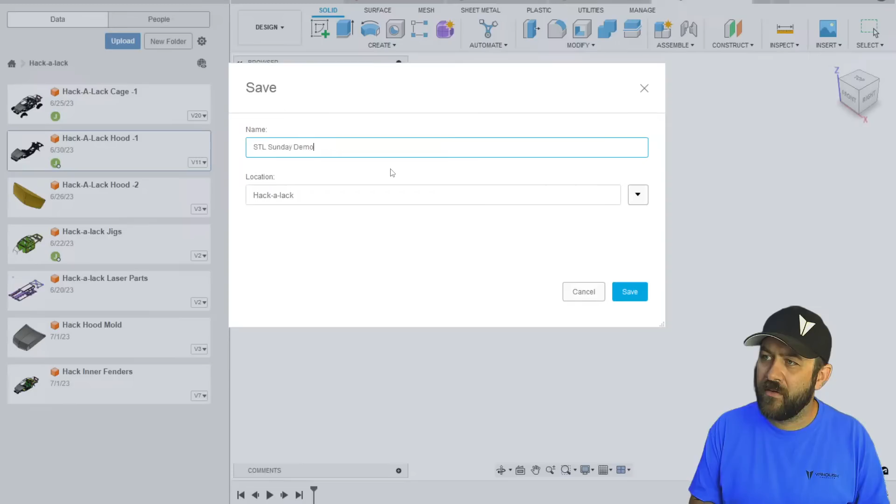scan data. Again, this can be about not just 3D scanning, because I know most people don't have 3D scanners. But also, if you've got an STL file, this can be handy because it handles it basically the same way. So we're gonna load this in. I'll show you a little bit of what I had done here. So I've already chopped this up too much to really make for a good demonstration. So let's just do it this way. File, save, STL Sunday demo scan. We have to save it to be able to bring in scan data. So from here, we're going to hit insert mesh.

Now this could also be things like your STLs. You could load them in from there as well. I'm going to go to my Escalade body scan. We'll let it freak out for a moment. And here is the Escalade scan data. Now, there's some weird stuff with this one because it's been fixed by filling in the backside. It wasn't really important. I just did it while I was checking things out. Well, I've already cut it up. Never mind. This was an HPI Escalade body for the, what was their truck? The Savage. And I wanted to use just the center section of the hood.

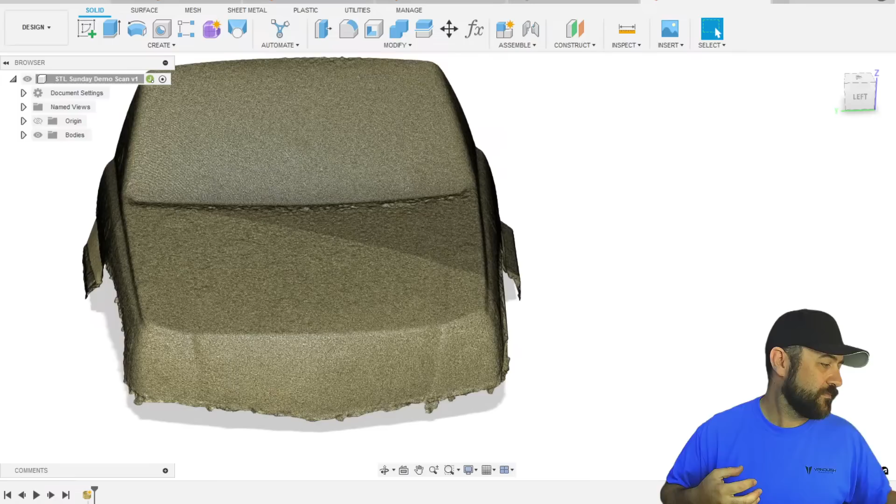But if you downloaded an STL file of a body you liked, a Mercury Cougar, whatever, I don't know where Mercury Cougar came from, then you could do a very similar process to this. And scan data on its own can be almost useless to you if you don't know how to use it. And that's the big problem with any tool. The CAD software as well. If you don't know how to use it, it's freaking garbage. It's just like, what am I going to do with this thing? And I've learned more every time I use it, so it becomes more and more handy.

But let me just show you a couple of the... Do you have to scale scanned files? No, if you have a proper scanner, it should bring it in exactly to dimension. And that's important because that's why I have a scanner. That's what I want it for, so that it is accurate. It should be perfect, and it is. So from here, I wanted to use this hood, but I didn't necessarily need this whole thing. So if I wanted to trim this down into areas that I needed, I'll create a sketch.

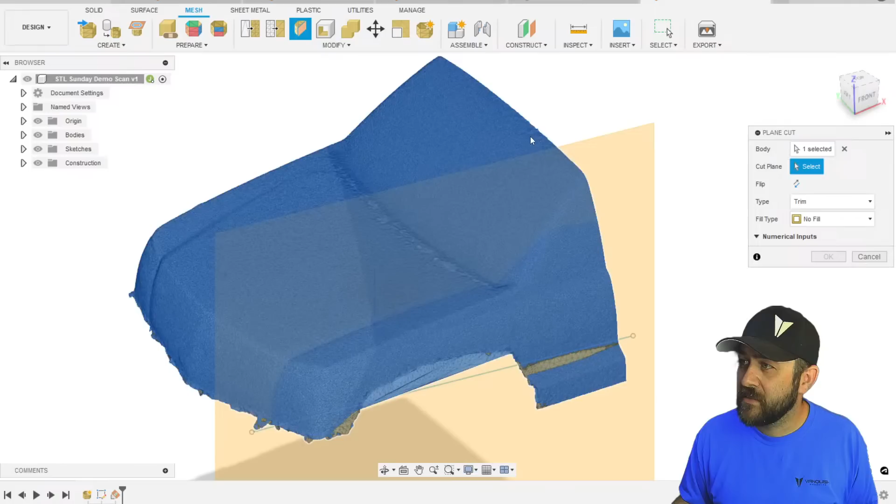I'll just select that top plane. And I know that I wanted to cut it basically like that. So I'm gonna hit finish, and I just have a random line, but we're gonna do like what we did earlier, and I'm gonna do plane at an angle. We're gonna select that line. I'm gonna hit 90 degrees. It goes straight up. Then in my mesh, I can do a plane cut. Select the body, select the plane. Do that. Trim, no fill.

Now I have half of the hood that I want. If I want to do the same thing again, select that, and we'll just select the my right side. We're going to flip the side that we want. I only want half the hood. There's no point in doing the whole hood because it's the same from left to right.

So just do half of it, and then you can go from there. Lastly, we'll do a sketch on the front, and we'll trim this scan about like that. Seems about right. Trim.

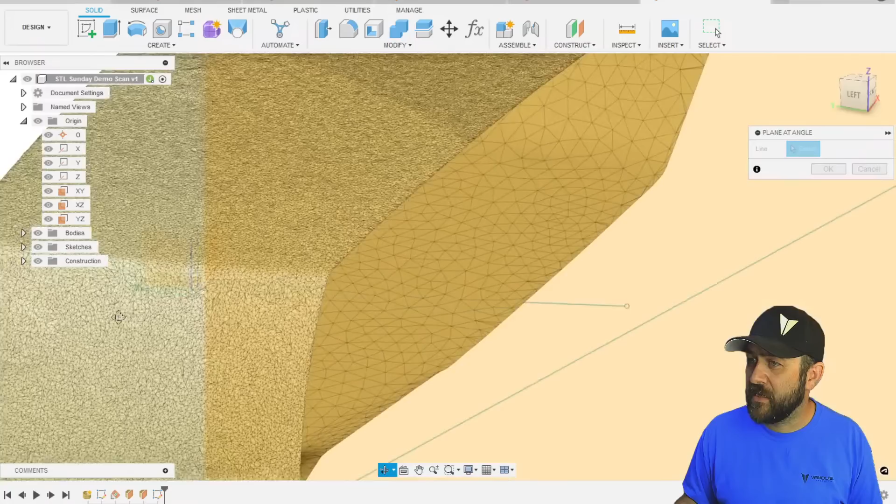Again, this can all apply to something you import just the same.

Mesh, plane cut, this body, this plane, and we'll hit OK. Now we've got a bunch of planes that are in the way. We can turn those off.

I also have a little bit more data that, like, I've got a second half of this thing down here. I can do a separate, select the body, hit OK. It'll separate those two shells out for me now. Whichever one, I don't need that guy, so we'll hit remove. And now I just have that center section of the hood that I wanted.

I can turn off that previous sketch, actually both of those. I don't need either of them. Still, this is somewhat useless to you. You have to go from here on how to use it.

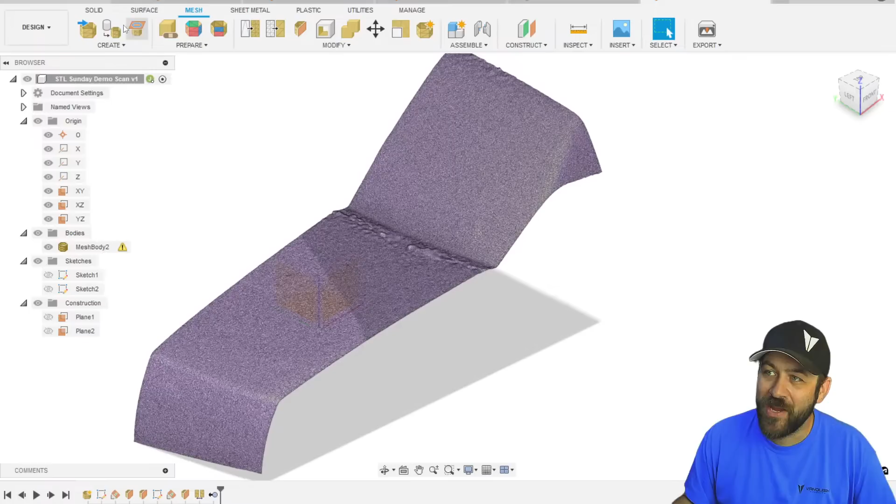So up here, this is the tool that's like, there's two tools you need for scan data or working with STLs to make things so much more powerful for you. So the first one is this right here, create mesh section sketch. Body is what we just did. Selection plane, for now, we're just going to use that right plane.

Awkwardly enough for this demonstration, it's not showing us everything we need. We just cut it along that, but for some reason, it's not giving me everything. Whatever.

Actually, I'm just going to take and drag that. I'm going to drag that way up here to just after the import. See if it still wants to act stupid. Okay, whatever. Put it back where it was at.

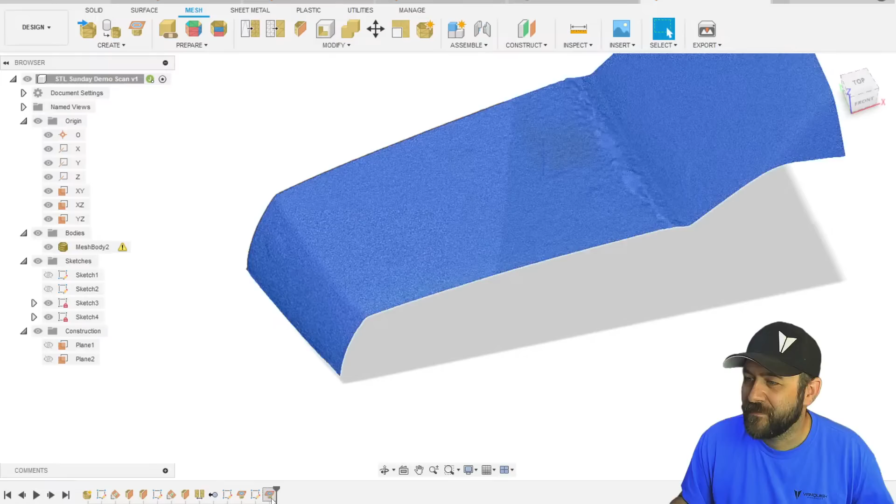So we're gonna do that one more time. Select that, and we're gonna select that plane that we created on the side and hit OK. Well, now this is just being ridiculous.

Let's see if it gives me my sketch where it should be. Sometimes Fusion just wants to be a pain in the ass, just to be a pain in the ass. Okay, I'm deleting both of those.

I'm going to roll this all the way back to where at the beginning we had our full... Oh, wait, I know why it wouldn't do it. Well, I know partially why.

Turn that plane back on. So I'm going to create that now. That body, that plane. Yep, there we go. Okay, now let's try it one more time with this and... There we go, now it's working. We've fixed it.

Roll it back until it's got things fixed for us. Looking more appropriate. So from here, it's given us these lines that we can now use to determine where the scan data intersected a plane. It's still not totally usable because this isn't like a normal sketch line.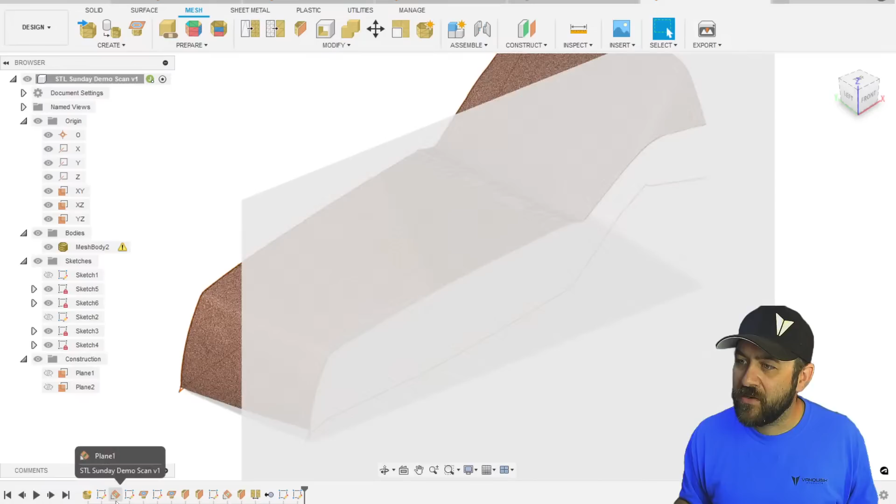It still acts dumb. You don't have any control over it. But what you do have control over is you come up here to create and you do, oops. We go back to that first one over here and we hit edit feature.

Oh wait, sorry, that was the, I need the... no. It's fixing itself.

Okay, so we come up to the sketches that we need. That's what it is. So you come up to this sketch, we hit right click, edit sketch. And now we come up here to the create menu and we hit fit curves to mesh section. And this is what's the most powerful part.

So spline fit tolerance, that is important. You can play with it. There's not an exact number to tell you, but we're gonna come in here and I'm gonna say I need this line to start about in here and then I want it to go to about here.

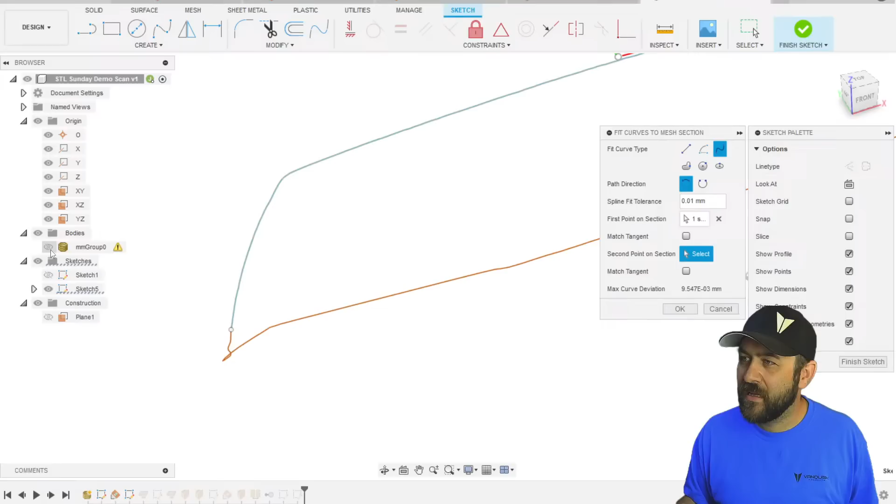And now you can see it's created this blue line that goes over top. That's more of a normal one. You can see it's not super smooth though, and that has to deal with this deviation. So we're gonna say like 0.5 and see how long. Sometimes it doesn't like to do it quickly.

Yeah, it likes to- we're gonna delete it. There it goes, we're gonna try it again. 0.5, first point.

This is one of those tools that is finicky. Now you can see how it's already starting to kind of blend, smooth those things out. It kind of depends where you want to put it. We'll put it like there. Now we'll hit OK, and now it's going to be a much smoother line throughout that whole thing. And that now is a usable line.

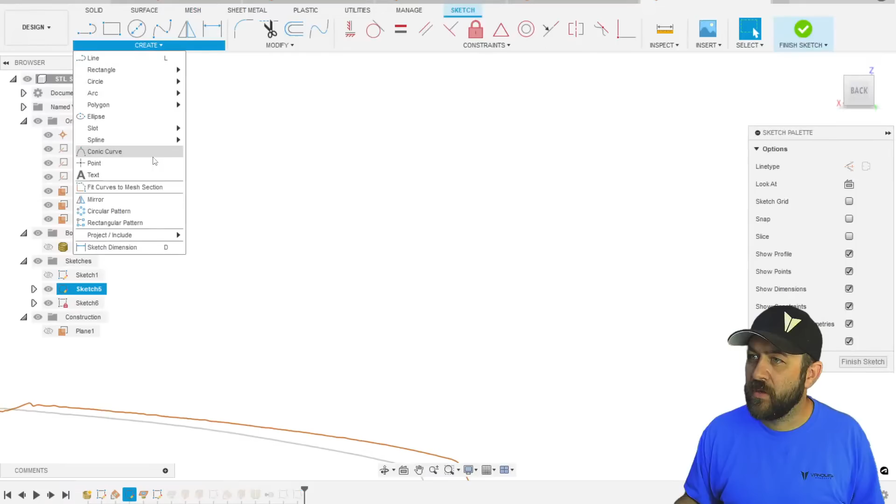We're waiting for it to think. There it goes. So we need to do that one more time with this one over here. That's this guy, edit sketch. Create fit curves to mesh section. And we're gonna do about the same thing.

We got some crazy noise in here, which is not great. For a design that I was really getting picky on, I would definitely go in and tweak on these things. So we're gonna hit OK.

We got a couple of things there. I'm not sure, this may not- none of you guys may care about this. This is one of those, but I'll just show you one more thing about this, because for what I would do from here, the next step often would be, I would actually be in the surface menu. Not always a super common thing for people.

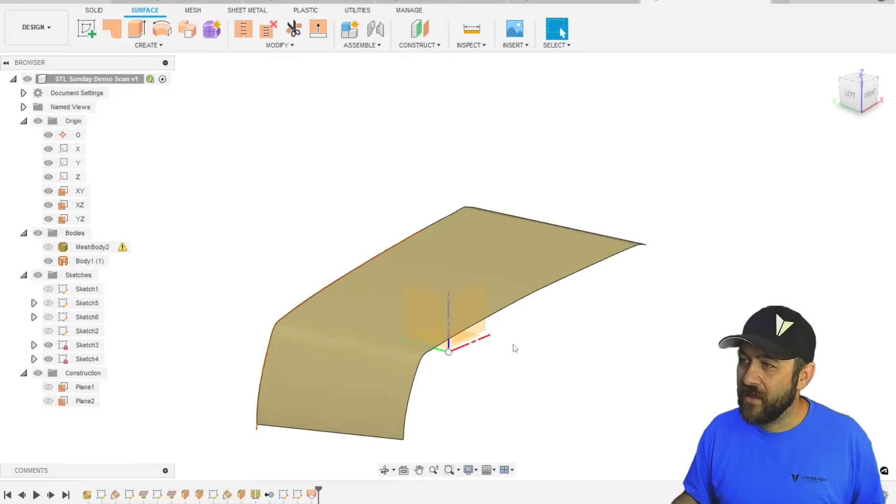Come in here and I would select that blue line that we created there, and then the other one, and hit OK. And now you've got basically what was half of that Escalade hood. I'm gonna hit R, which is the hotkey that I've set up to flip the tangency, or the normal- it's the normal direction of the hood actually. Again, this doesn't apply to most people, I understand.

And now if I turn the scan data back on, it follows that hood pretty much right on. It's a little under there, things like that, but that's pretty close to recreating that hood of that Escalade.

Working with surface is a whole nother world. It's a lot of fun, it's super powerful. Like I could hit offset from here and say 2 millimeter, go up. I would actually need to reverse that bottom one again. But I could probably do another loft between that and that. And then I would just kind of repeat that a few times.

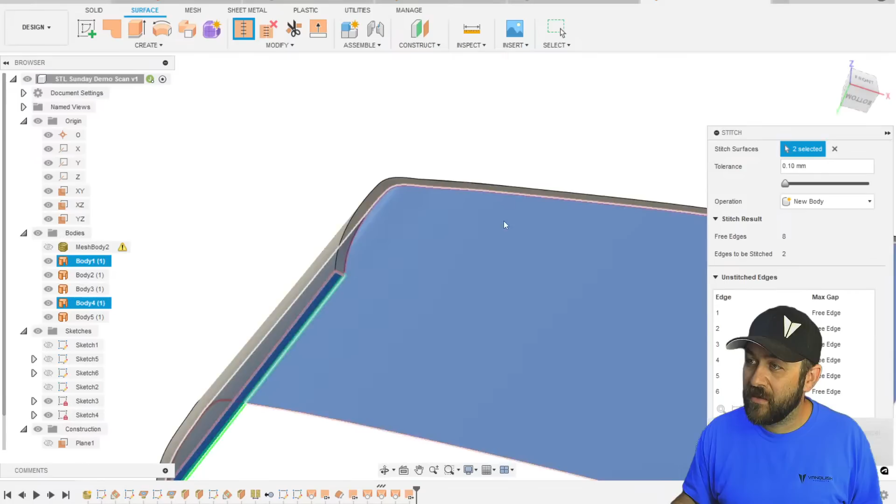That line and that line. Loft once more between here and here. And I need to actually reverse the normal of a few of these, so you have to do that. Then you would stitch all of those surfaces together. And the last thing to do would be to patch this one side.

And if I reverse the normal on that so that all the normals are the right way, stitch everything. And right now over here on the left side, you see where it says body 5? Once we do this, now it has turned that into a solid. This is like a normal solid that you have worked with before. Now it went from being a surface to an actual solid.

You can see in here how this is a little funky. This isn't perfectly straight- I would fix that. If I was making the Escalade hood that I recreated, I would fix that personally. But you don't have to.

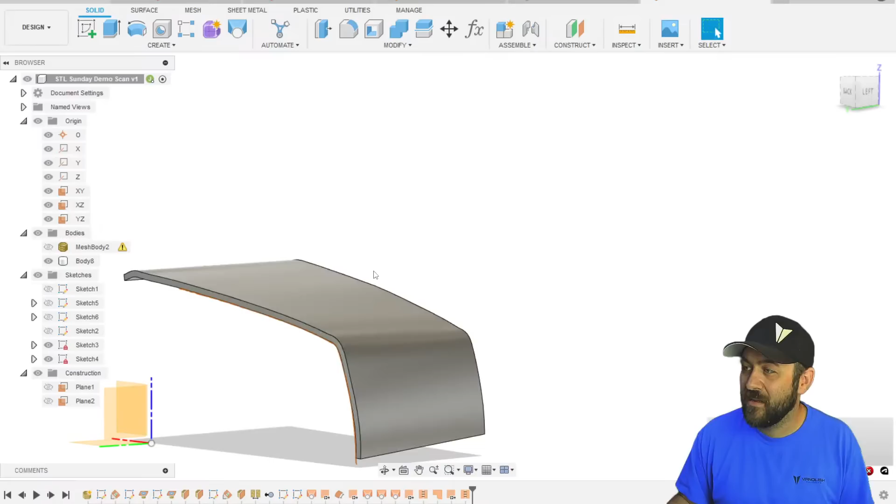If you just mirror this on that plane- it wants to not do it. Let's...

Decent amount of work to recreate a fairly simple shape in this kind of way, but this really isn't a simple shape. It's got, you know, it curves down here, up and around. None of these are flat surfaces. To recreate this any other way, it would take way more time. This is a really quick way to get this stuff done. This is not just some simple flat shapes with some fillets.

It's not- if you go to inspect and you go to zebra analysis, if this was flat shapes, these lines would be straight. When you look at it, you can get areas that are fairly straight, but they're not perfectly straight.

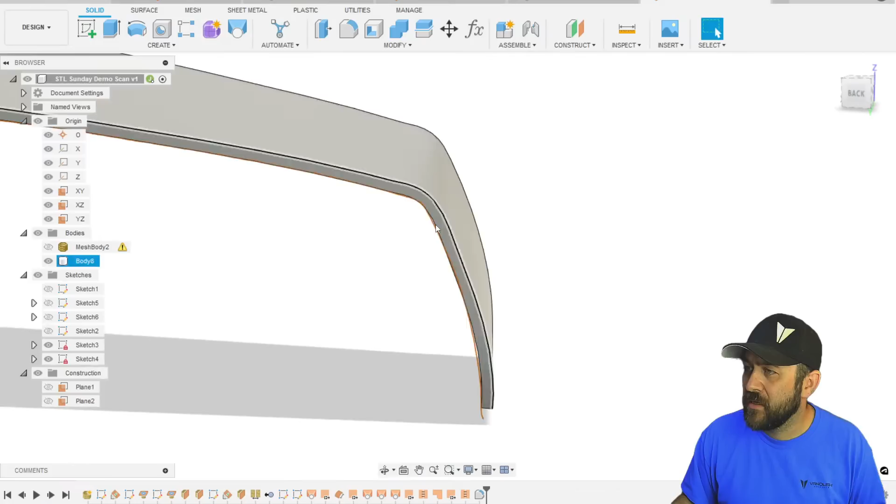So that'll give you a bit of an idea. Oh yeah, I was trying to get that mirrored, and for some reason it was not wanting to. I'm just gonna- oh, I see why it doesn't want to. It's for some reason doesn't want to say that that is a flat.

We're just gonna cheat, and we're gonna go -0.1. Letting it think. So it's that guy, we're gonna do a quick- oh, it didn't even want to do it there. Okay.

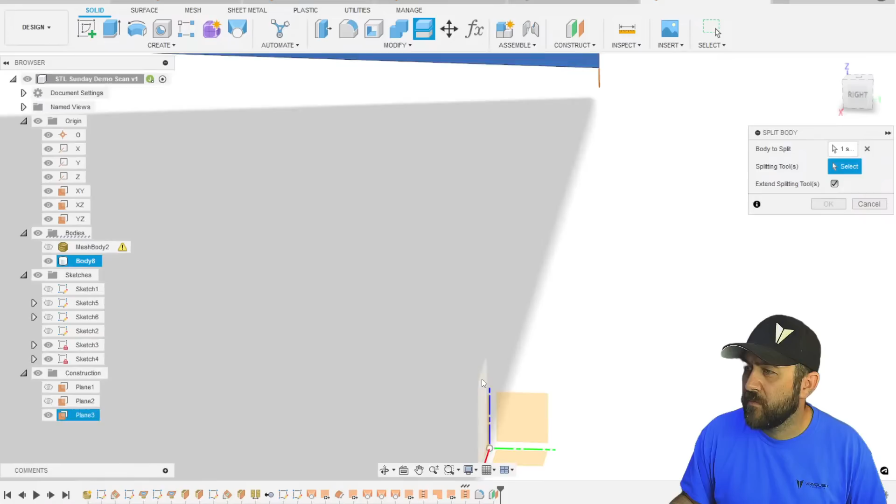Did that cut? Oh, it still wouldn't do it because it didn't do it the first time. Let's see if that should get some of it. There we go.

This is again just for demonstration, probably not the way that I would do it, but there you go. That pretty much recreates that Escalade hood.

From here, if I go to... someone had asked about the mold making process that I do to create the forged carbon stuff. I said I wasn't going to do this, but if I switch to this, this is that hood that we basically just drew.

And I've already made it out of forged carbon fiber. I started that process yesterday, or the day before, whatever, and got that done. I've got it wet sanded here, but I needed to create the molds and everything to be able to do that, to do forged.

So switching back before we start discussing, I'm going to take this and roll it to this point. This is the actual Escalade hood that I drew and made. You can see it's a little bit sharper in the cowl area. I made things a little bit more, a little bit tighter. I spent a lot more than 20 minutes on it, or 15 minutes, whatever that hood took us.

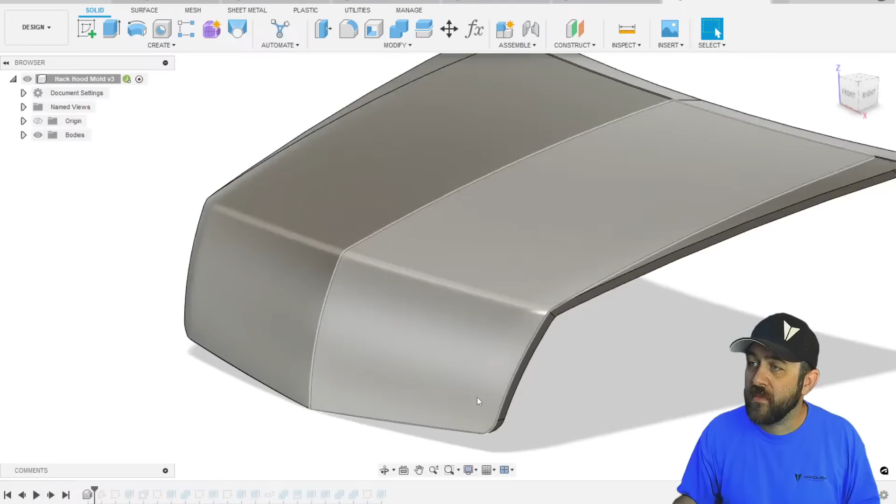So after importing the hood, the next step was I created a new plane. I did it on 3 points, the back corners of it, and then the tip of the hood, just the tip. Then I did a sketch that was a projection of the hood body, that way I could extrude that up to the hood object.

And this created the large solid that I would need to basically make the negative of the mold. I extruded that down a little bit to give me a little bit more area or depth on my mold itself.

And then from here, I will have created a sketch around the outside. So here you can see the sketch going all the way around the outside. And then we would have extruded that big blank body over top. Both bodies are still there. I can turn off the original hood and it's just encompassed in there.

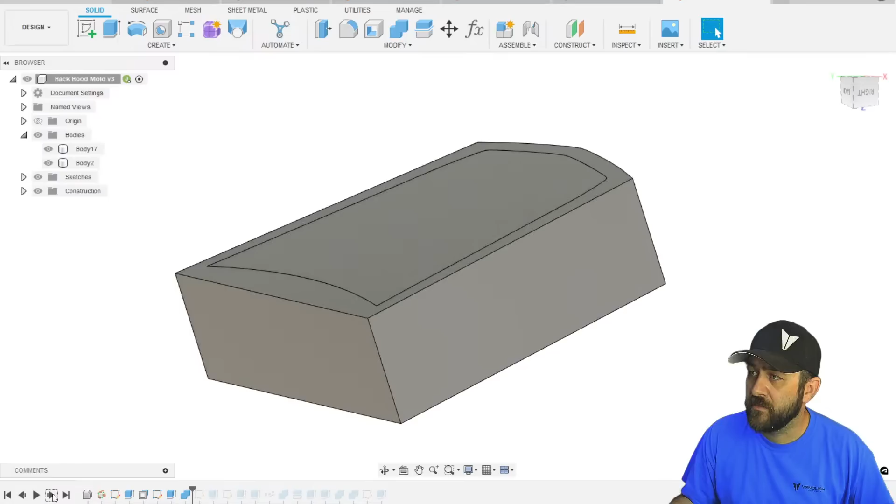So from there, I did a subtract. So now if I turn off that main hood body, you can see we've got a big old hole in that blank that is the shape and size of the hood.

More sketches, and that was just to reduce some printing time by taking a wedge out of the bottom. I shouldn't have done that though. I should have left that flat so that my pressure during compression was perpendicular to the surface that I was clamping onto. I wasn't thinking when I did that.

I did it too fast, and it caused me an issue during the molding, but I was able to correct it after the fact. From there, I created a sketch that went around the outside to give me my bolting flanges. Oops.

So created the bolt flanges, and then I created a body that would become the bolt hole. From there, I patterned that around with the pattern—what's it called? Pattern on path. So I just selected the object, had a sketch that went around. I said put 10 holes equally spaced around it, or 10 objects.

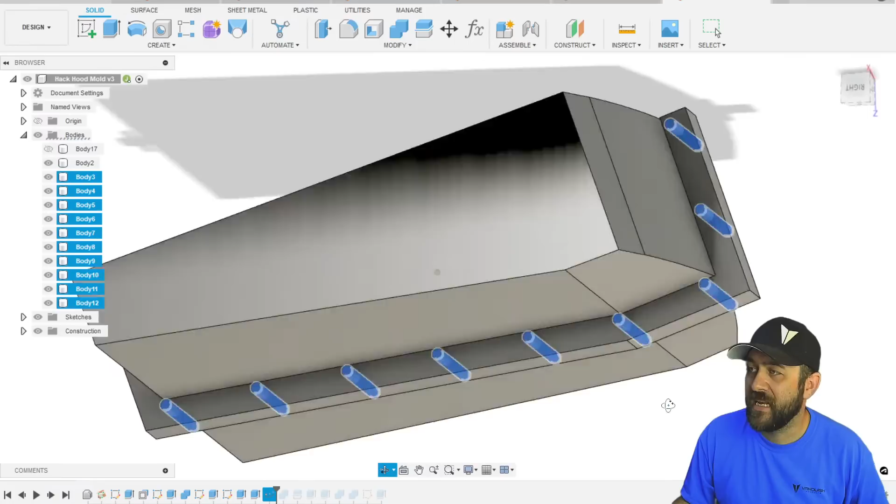So I did that, and then I did a subtract of those objects. Then it gave me 10 equally spaced bolts. Then I cut the body in half, and you can see up here how things were kind of funky there.

So, like I meant to say, I extruded that face in and then combined it. What is that guy? Why did I do that? Oh, that's just because the other side isn't shown. So I combined them. So fixed that.

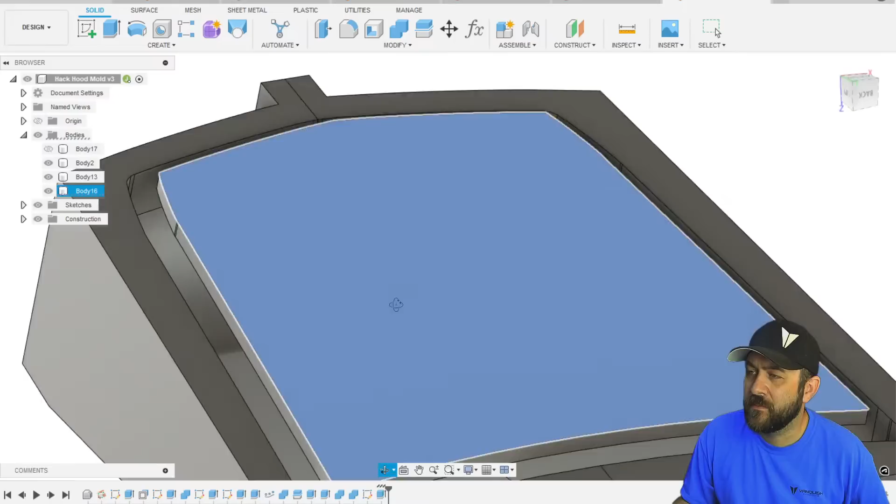And then this last portion was just a plug part for the top to give me a pressure plate so that I could squeeze the silicone down on top of it with a nice 3D printed portion. So if I go to bodies, it's just a flat plate, but that's my two halves of the mold that I printed for the carbon fiber hood.